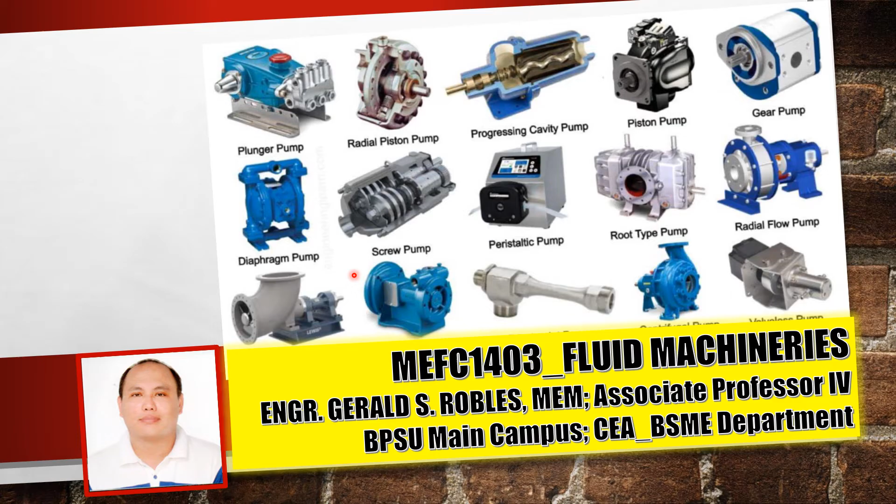So ang featured topic natin for today is about the so-called pumps. So at the conclusion of this PowerPoint presentation, you the student is expected to have a broader idea of what a pump is all about. So ano na ba yung mga possible points of application or usages nito, yung mga classification ng pumps, and then yung mga corresponding examples niya falling under such classification. Then sa citing natin dito yung mga corresponding advantages and then disadvantages, and then yung corresponding parts of such pumps that might fall under such classification.

So bago tayo mag-start sa ating discussion, let us first have a look at the different types of pumps that are commonly found in the market. So tingnan natin one by one yung mga pumps na sinasabi ko. So first one is we have the so-called pitcher pump. Tinatawag siyang pitcher pump kasi nga basically yung pinaka-body niya resembles that of a pitcher o tinutukoy nating pitchel. So another one is we have the so-called centrifugal pump, which is by far the most popular and then most common type of pump that is used in any type of industry.

So later papaliwanag ko yung mga possible reasons kung bakit siya yung pinaka-most popular and the pinaka-most common type of pump. Then another type of pump that could be found in any residential or commercial applications is the so-called jet pump that is used typically in any jetmatic water systems na ginagamit natin usually sa bahay. So another is yung tinutukoy nating reciprocating pump na dahil sa kanyang sheer size or sheer volume, sa sobrang laki niya, it is only to be found in the industrial or power plant industry.

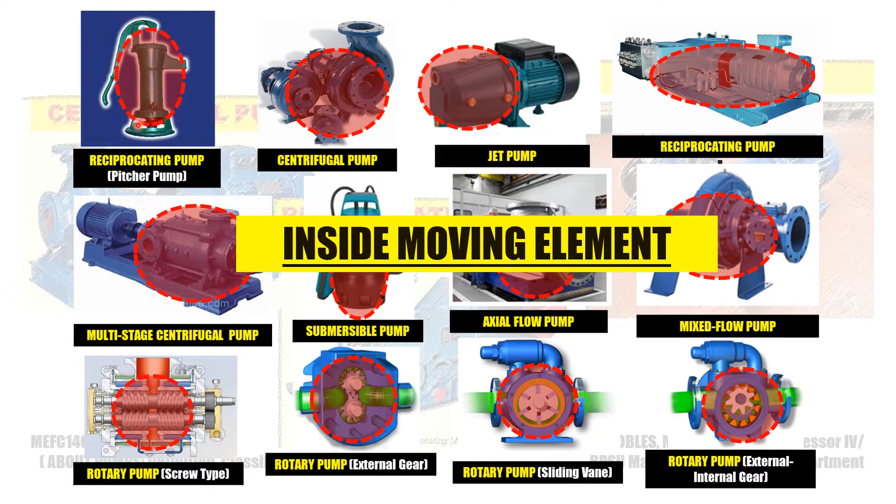So ano ba yung tinutukoy natin pumps? So again, as what was mentioned in our previous discussions, pumps are considered to be machines or devices that are used to handle liquids. So based upon history, yung pumps are considered to be one of the earliest inventions as evidenced by the so-called Archimedes screw, which was used by ancient Egyptians in moving liquids from canals by moving a very large screw that is actually enclosed in a cylinder.

So yung pumps are considered to be one of man's oldest aids. So it only ranks second to the electric motor and then that of the internal combustion engine as the most commonly used device or machine. So pumps are used to handle or convey or move liquids in whatever amounts, from a few liters or gallons up to billions upon billions of any types of liquid for a wide range of applications. So ang pumps are considered to be workhorses.

Wala siyang kapaguran as they could be able to be operated non-stop, not only for a period of 24 hours a day, 7 days a week, 30 days a month, but be certain times that it could also be operated non-stop for a period of 5 to 6 months. So bali, ang pahinga na lamang nila is yung tinatawag nating shutdown or itinutukoy nating preventive maintenance. Where after nito is i-operate na naman natin non-stop yung mga pumps natin and so on and so forth. So bali pa ulit-ulit na lamang yung cycle.

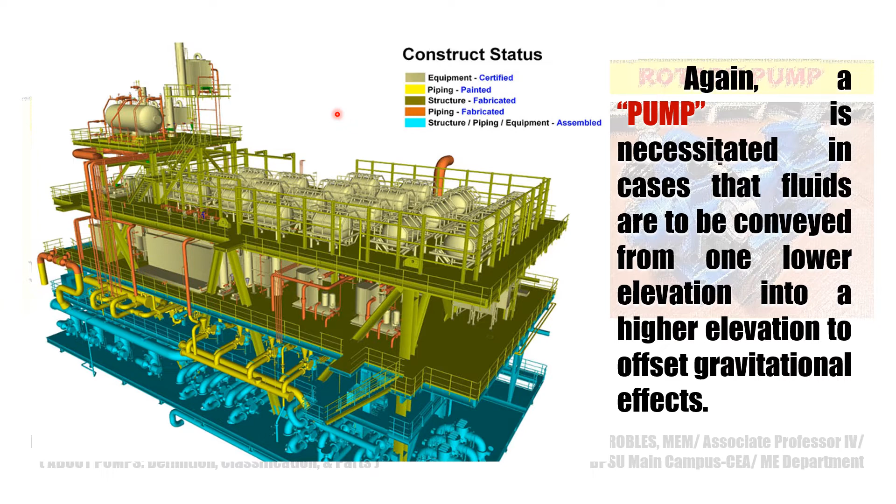As I said before, pumps are not only found in industrial or power plant industries, but also right in our very own homes. We need to remember that for as long as there is a presence of liquid that needs to be moved, a pump is always necessitated.

The liquid being mentioned could be any kind of liquid chemicals, highly flammable or volatile fuels such as jet fuel. It could also be slurry substances, a combination of solid and liquid such as cement mixture, or high temperature liquids with temperatures ranging from 1000 degrees Fahrenheit and above. We can also use pumps to move hazardous or poisonous liquids.

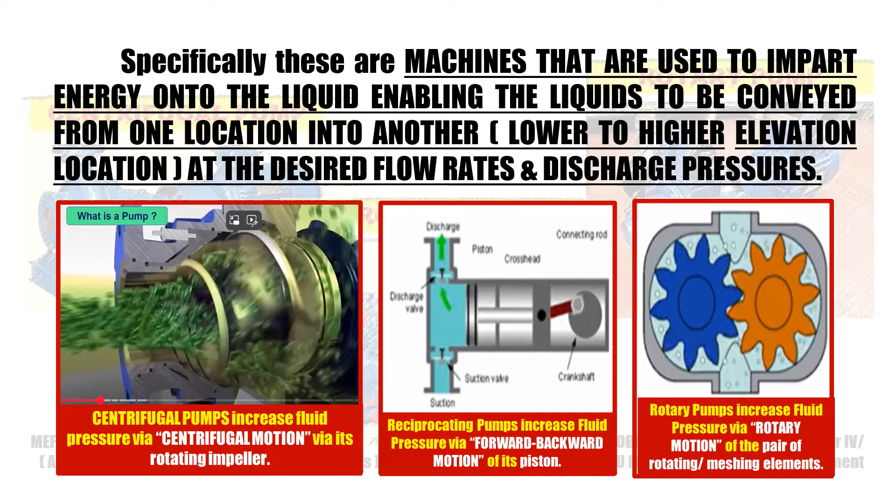Pumps are able to increase the pressure of the fluid or liquid by imparting or transferring energy onto the liquid via the internal working element that a pump possesses. So it's not only that the fluid is moved, but it is also delivered at the desired flow rate, however much or little per unit time, and it can also be delivered at the desired pressure range - high, intermediate, or low pressure ranges.

With all these cited traits or capabilities, this is basically the reason why pumps are considered to be an indispensable kind of machine. We have what is called the centrifugal pump, the reciprocating pump, and lastly, the so-called rotary pump.

So again, the effect of most pumping devices, which should fall under any of the three pump classifications - dynamic or kinetic pumps, reciprocating pumps, and rotary pumps - is to be able to increase the pressure of the fluid.

We need to increase the pressure to be able to offset the effects of gravity, because liquid is considered to be a dense or heavy substance. We need to remember that for as long as we have pressure, it also follows that we are imparting a force to be able to counter the effect of the weight of the fluid that is to be moved or handled.

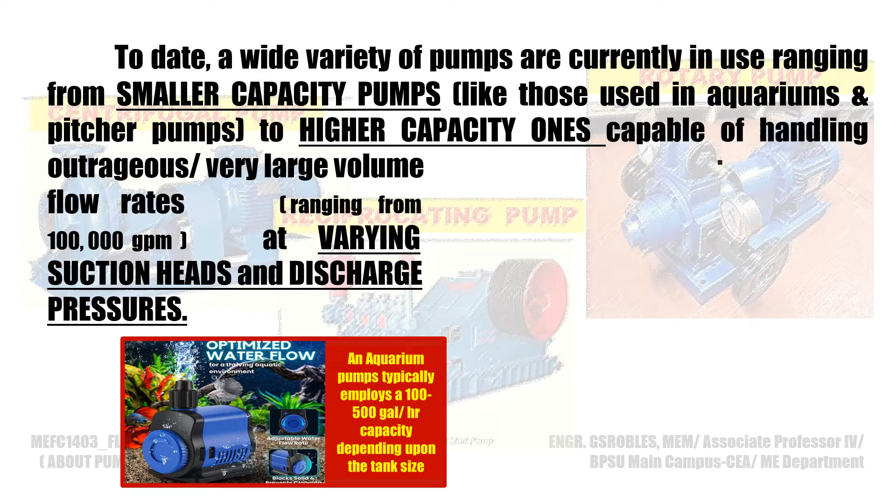To date, we have a wide variety of choices of pumps available in the market nowadays, catering to specific needs. We have smaller capacity pumps like those used in aquariums, and pitcher pumps or the so-called poso found in our backyards.

And then we have the higher capacity ones, with ranges from 100,000 gallons per minute, at varying suction heads - which could be shallow or deep - and varying discharge pressure from high to intermediate as well as low pressure ranges.

With so many pumps available in the market nowadays, what are the pump classifications that we have? Classification of pumps is actually based upon the internal mechanical configuration, and specifically on how energy is actually being transferred onto the liquids.

We have two pump classifications: the so-called positive displacement type, and the so-called dynamic or kinetic type. Under the positive displacement type, two fall under such classification - the reciprocating pumps and rotary pumps. Whereas for the dynamic or kinetic type, only one falls under that category, but it has five types or kinds.

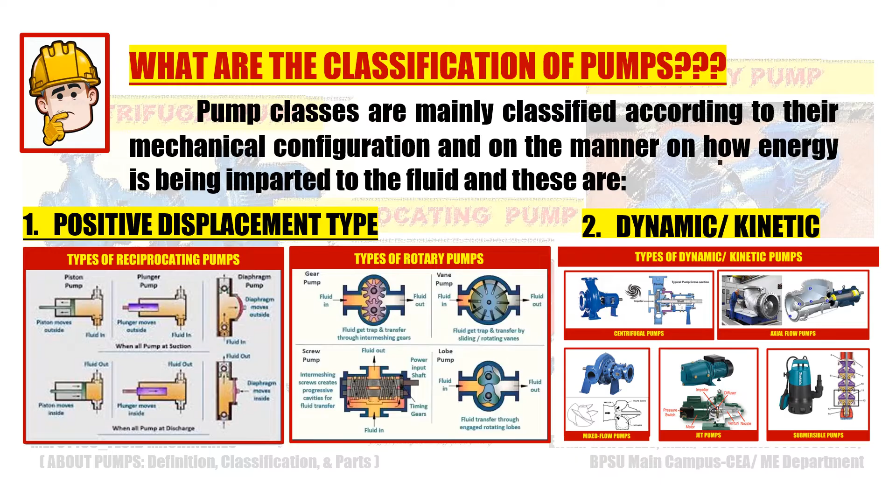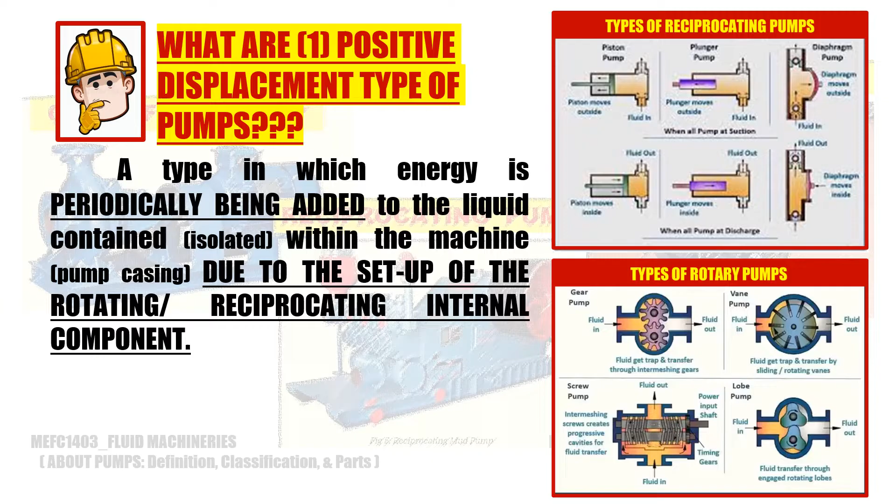Positive displacement type pumps are pump types wherein energy is periodically being added to the liquid being contained or isolated, which is actually part of or due to the setup of the rotating or reciprocating internal component that could be found on the inside. They are called positive displacement type pumps because there is isolation of the liquid which is eventually displaced or moved. Positive displacement type pumps actually offer higher discharge pressure but at lower volume flow rates or discharge rates, as compared to the other pump classification, which is the dynamic or kinetic type of pumps.

A reciprocating pump is one of the two types of pumps falling under such classification. It is considered a positive displacement type of pump that traps a fixed volume of fluid inside the pump casing and physically moves such fluid in a back and forth or reciprocating motion, normally in the form of a piston or a plunger.

As for reciprocating pumps, we have three pump examples falling under this category: piston pumps, plunger pumps, and diaphragm pumps. The piston is basically small in size. The plunger is very similar to the piston, except that its corresponding size is bigger. The piston and plunger pumps basically have a rigid or hard working element, unlike the diaphragm pump, where the working element is actually made from a flexible type of material.

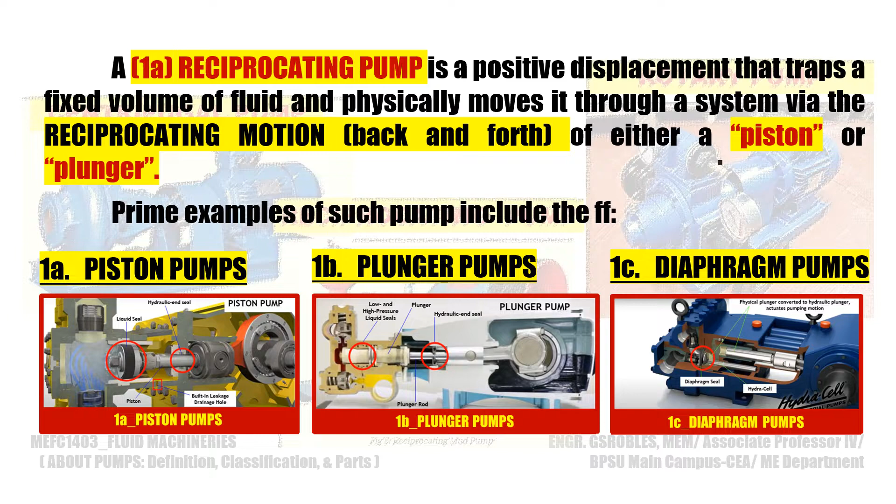As for the working principle, this involves the forward and backward motion of the working element. First, the forward motion: as the element moves away from the suction valve, it creates a vacuum, a negative pressure, sucking in or allowing fluid to move inside the chamber. In the backward motion, as the element moves towards the discharge valve, the fluid is eventually pushed or discharged outside the chamber. This process is repeated over and over again for as long as the prime mover, which is normally an internal combustion engine, is operating.

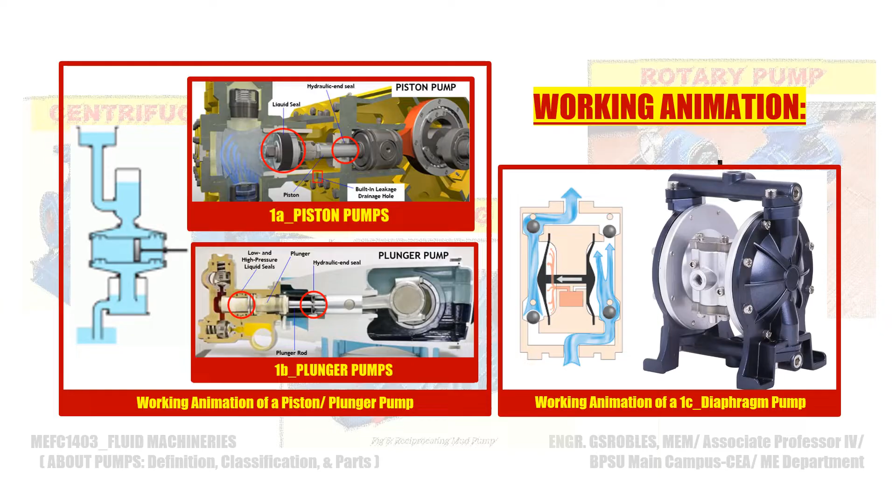Now, to have a better understanding of how such a pump type operates, we have here a working animation of either a piston or plunger pump as well as a diaphragm pump, showing how fluid enters and eventually goes out of the cylinder or chamber.

Let's cite the corresponding differences between a piston and a plunger pump. Earlier it was mentioned that the difference between the piston and the plunger type is in terms of ring sizing. The piston type has a smaller corresponding size, thus it has a lesser rubbing or contacting area. The plunger type is bigger, thus it has a higher rubbing or contacting area. Technically, it gives off a more positive kind of pressure.

Another difference is that the piston type is only used for low pressure applications, light duty or intermittent service. When we say intermittent service, it's not continuous service or continuous operation, rather an on and off operation, meaning there are times it operates and times it doesn't.

As for the plunger type, it is actually used for high pressure applications, meaning heavy duty applications, and for continuous service, since the contacting or rubbing area takes longer to wear down or erode.

Another difference is that since the piston type is smaller, it makes use of a lesser volume of material, thus it is considered less expensive than the plunger type. For the plunger type, a bigger volume of material is used, thus it is actually more expensive than the piston type.

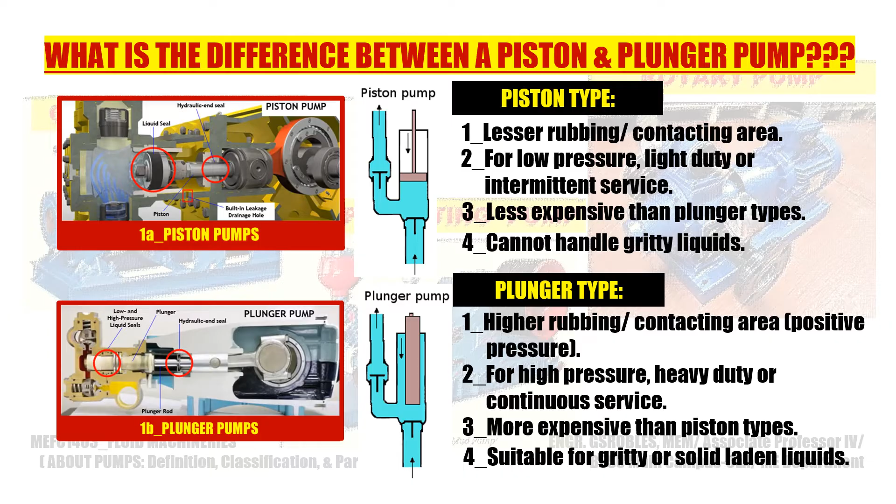So what are the typical parts of a reciprocating pump? One is the main working element, which could either be a piston or a plunger, which moves in a forward-backward or reciprocating motion.

Two, we have the connecting rod, which transmits the reciprocating motion coming from the crank cam assembly. Three, we have the suction valve, which allows fluid to enter the pump chamber or cylinder during the suction stroke. At the time of the discharge stroke, this suction valve is closed.

Four, we have the discharge valve, which allows fluid to be discharged outside during the discharge stroke. Technically, this discharge valve is closed during the suction stroke.

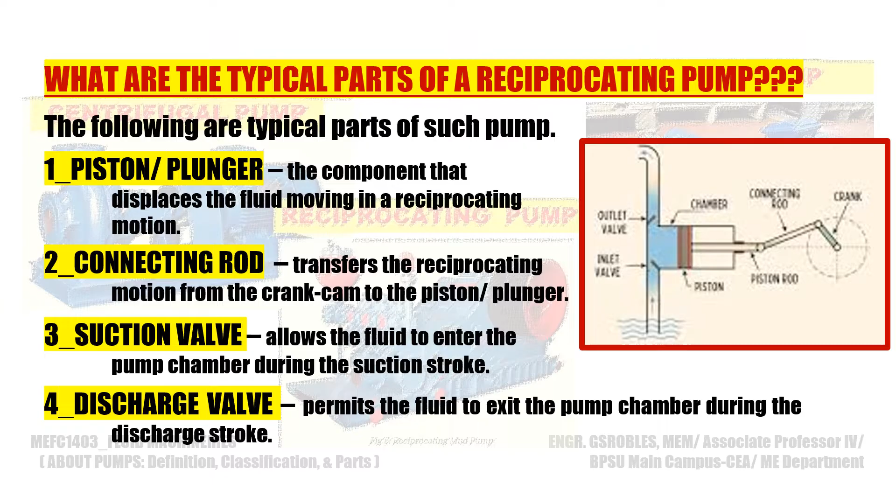So 5 is the so-called cylinder, which is considered to be an enclosure or chamber that allows the reciprocating motion of either the piston or the plunger to take place.

So 6 we have the so-called check valves. The check valve is actually necessitated for it controls the direction of the flow.

Then 7, the last one, we need a prime mover. This one provides the motion on the part of the piston or plunger pump, which could either be an electric motor or an internal combustion engine. But of the two kinds of prime mover, more common is the internal combustion engine as the source of motion in the case of a reciprocating type of pump.

So as for the advantages of a reciprocating pump, we have 3 distinct advantages. One is that it is ideal for applications requiring higher pressure or higher discharge pressure. Number 2 is that as it is able to discharge fluid at high pressure, the same goes with its suction pressure, as it is also able to generate a higher vacuum pressure. So such pumps are used for high head applications, meaning the source is very deep.

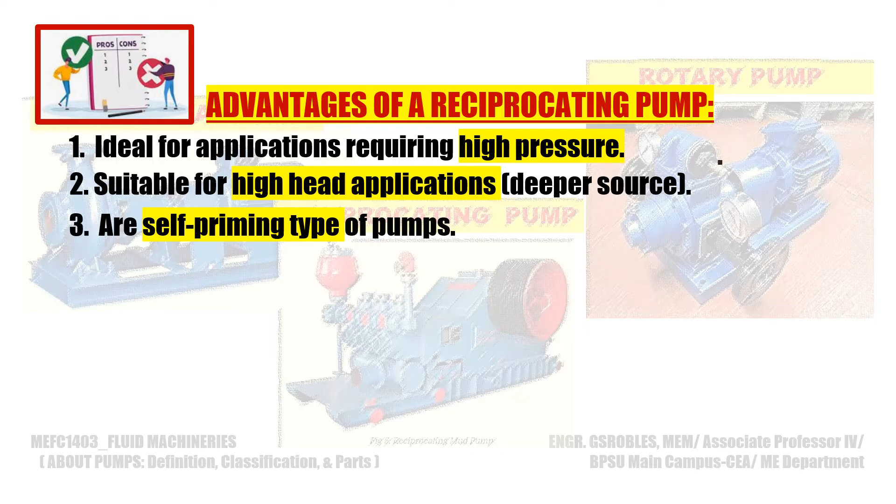Third and last is that such pumps are considered to be self-priming. Upon operation, the pump is able to deliver fluid at the soonest possible time, even without the aid or use of any additional mechanical device to help in pump priming or pump conditioning.

Now let's move to the disadvantages. These are the cited negative attributes. One is that its flow is considered to be pulsating, meaning that the flow is not continuous. So it requires pulsation dampeners for very sensitive applications to correct this flow.

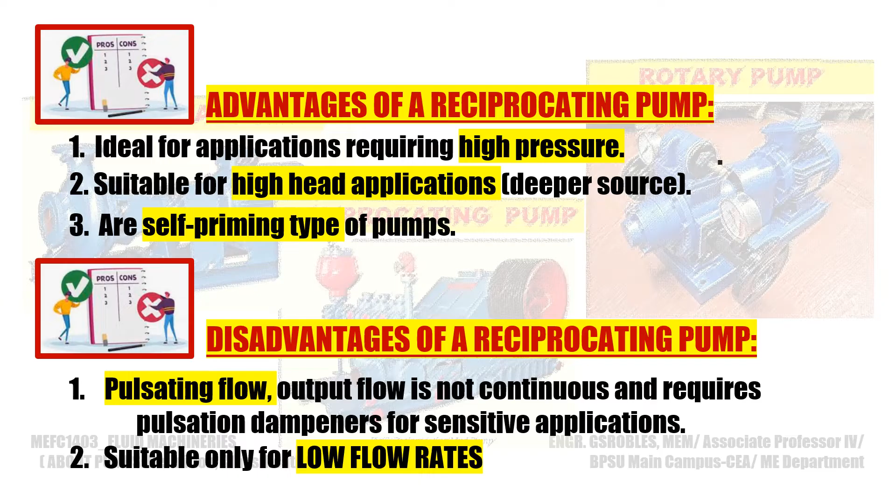Number 2 is that it is only suitable for low flow rates or low rate of discharge.

Number 3, because its internal configuration has very small pockets or clearances inside, it is not advisable to be used for solid-laden or abrasive-laden liquids since there is a possibility that solids may accumulate in these small pockets or spaces. Number 4, compared to other pump types, they are actually more expensive due to its complicated design.

And that it actually requires a larger floor space for mounting.

Number 5 is that during operation, there is strong vibration as well as noise. Then number 6 is that it requires higher or more complicated maintenance due to the numerous moving parts that are subjected to higher pressures.

So if a question arises as to why reciprocating pumps are not advisable for household applications, these are the cited possible reasons. First, the discharge pressure is too high. Another is that it requires a larger mounting space. It's also too expensive, noisy, and has vibrating characteristics which could disrupt the household, and its maintenance is complicated. This actually requires a highly trained individual.

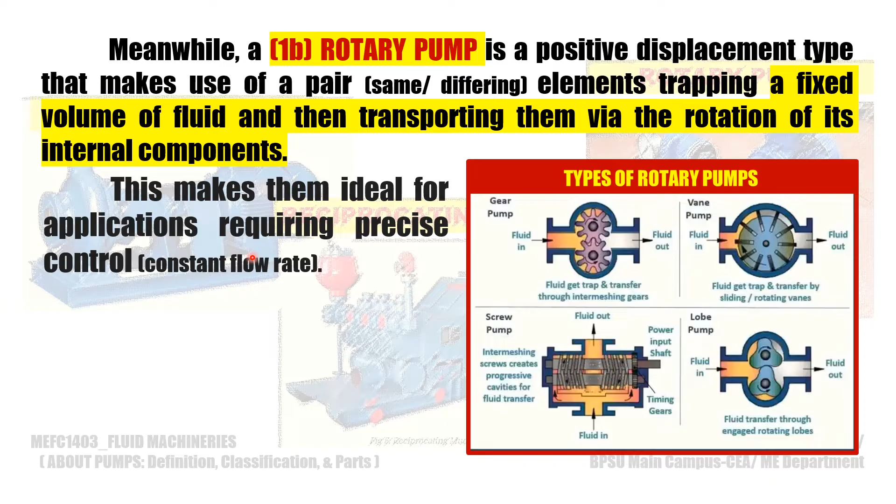This allows rotary pumps to be ideal for applications requiring precise control or constant flow rate. Another is that rotary pumps are versatile in that they could be used for viscous, solid-laden, and sensitive media or fluids evenly without any case of pulsation.

So let's review our discussion. In reciprocating pumps, it is characterized by the forward-backward motion of its main working element inside. In rotary pumps, it is characterized by the rotation of the pair of working elements inside. In both cases, there is enough clearance inside the pump casing to allow the movement of their internal working elements, small enough to prevent possible friction and loss of pressure inside.

In terms of parts, a rotary pump typically has the following: first, the housing or fixed casing that houses or encloses the rotating meshing parts. Second, the rotors, which are the main working element that creates pockets for fluid entrapment and eventual transfer. The rotor could be gears, vanes, screws, lobes, or other elements. Third, the seal, which ensures minimal leakage between the rotating and stationary parts. And then we have the inlet and outlet ports, which serve as the passageway for the entry and eventual exit of the fluid being handled by the rotary pump.

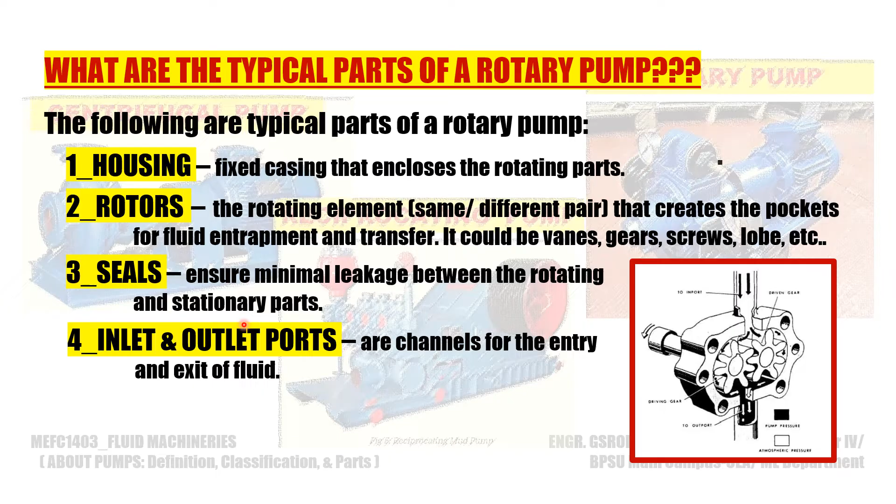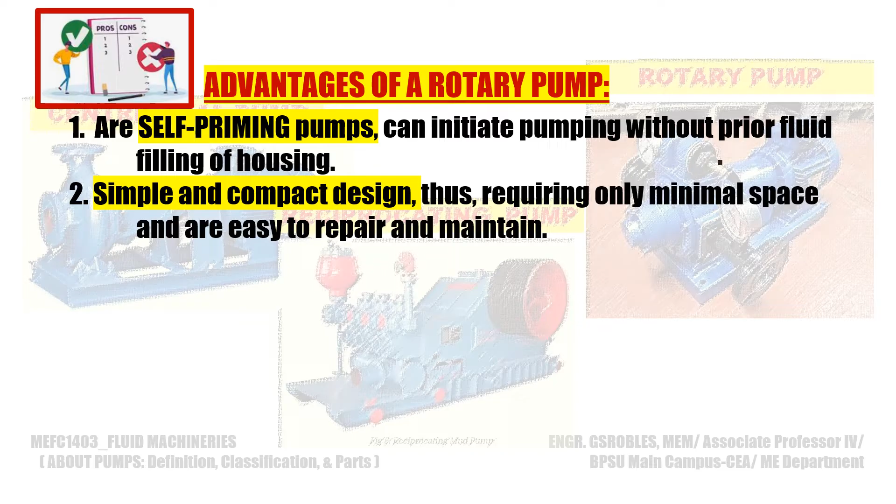As for the pros and cons of a rotary pump, here are the cited advantages. First, like reciprocating pumps, rotary pumps are also self-priming in that they are able to discharge liquid at the soonest possible time without prior need of fluid filling of the housing, which is called priming. Second, unlike reciprocating pumps, rotary pumps have a very simple and compact design, meaning they only require minimal mounting space and are thus easier to repair and maintain.

Now as for the cited disadvantages: such design requires tight clearances between the rotors and housing, which could eventually lead to possible wear and tear over time, leading to a loss in overall efficiency. Second, such pumps are not designed for high-speed applications, as it could eventually cause wear and tear on the part of the rotors.

Third, like reciprocating pumps, rotary pumps too are considered noisy during operation and require some soundproofing measures in some applications. Fourth, there are certain types which are not suitable for solid-laden or abrasive liquids. Fifth, rotary pumps have the second lowest discharge pressure among the pump kinds, with the reciprocating pump being the highest and the centrifugal pump being the lowest. Lastly, similar to centrifugal pumps, rotary pumps are susceptible to cavitation, an undesired or destructive phenomenon where there is formation and eventual collapse of vapor bubbles, which could possibly damage the rotors and inside surface of the housing.

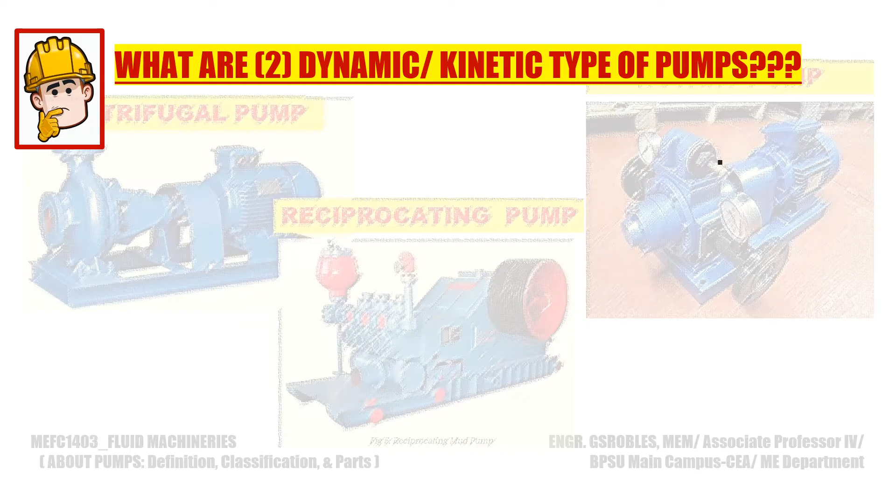Now, the last classification of pumps is the so-called dynamic or kinetic type, which is by far the most common and most popular type of pump available in the market. Most of these are what we see in our households. A dynamic or kinetic pump is a pump type wherein energy is continuously added to increase the speed or velocity of the fluid being handled, hence the term kinetic, mainly because of its main working element, which is what we call the impeller.

Under dynamic or kinetic pumps, we have the centrifugal pump, the axial flow pump, the mixed flow pump, the jet pump, and the submersible pump.

In these pumps, the fluid or liquid is able to enter the pump casing without any delays or interruptions because there is nothing blocking it—there is a continuous passageway from the side. Hence, there is continuous energy transfer by the rotating element in the form of what we call an impeller. Let's look at each one by one. For the centrifugal pump, it enters from this side and exits without much delay or interruption.

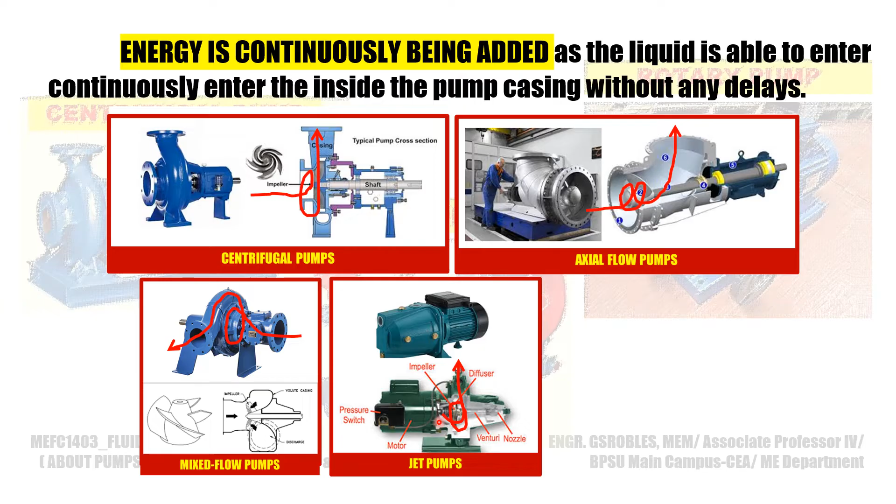Same with the axial flow pump: it enters, swirls before being diverted vertically. Same with the mixed flow type of pump: it enters, swirls, and is then diverted to the other side. For the jet pump, it's the same—it enters, revolves radially before being discharged radially again on the other side. Then we have the submersible pump: from its base or bottom, it enters, swirls along the impellers before being diverted to the other side or end.

So let's review so far. If you recall, the reciprocating pump is characterized by the forward-backward motion of its piston, plunger, or diaphragm, whereas the rotary pump is characterized by the rotary motion of the pair of meshing or rotating elements, which could be vanes, gears, screws, lobes, etc. In both pump types, the fluid is trapped and then moved by the working element inside, hence the term positive displacement type—it cannot move or transfer energy unless the working elements inside are able to move due to the part configuration inside. In the case of dynamic or kinetic pumps, there are not as many interruptions because the passageway is almost a straight path.

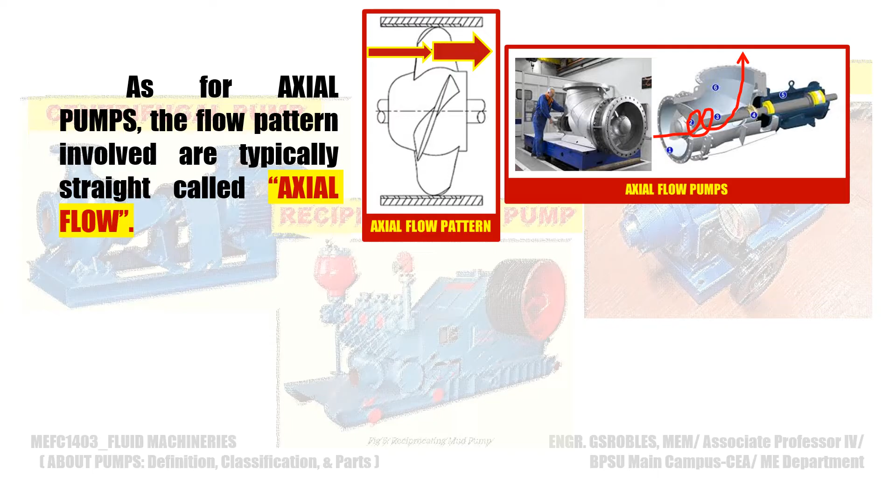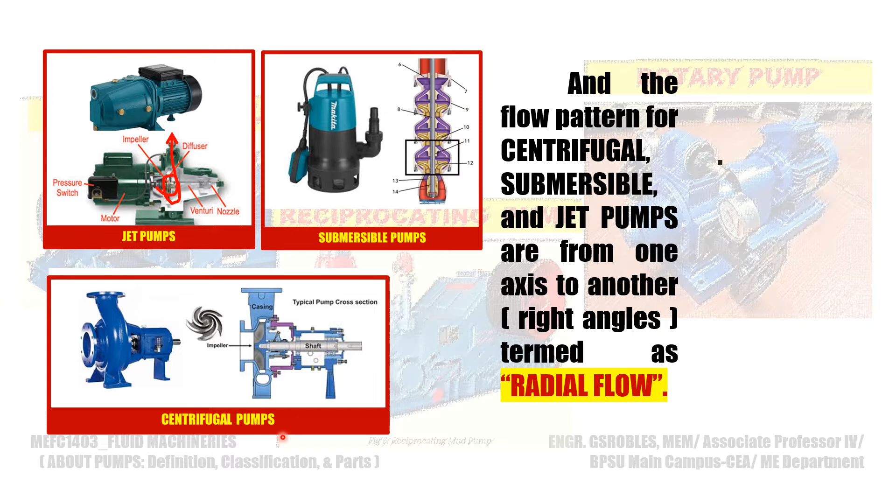Now, as for the pumps falling under this category, yung tinutukoy nating dynamic or kinetic type of pumps, meron tayong three kinds. Namely, we have the so-called axial pumps, then we have the so-called mixed flow pumps, and then third and last one, we have the so-called radial flow pumps.

So, unahin muna natin yung axial pumps. Dito sa tinutukoy nating axial pumps, yung fluid to be conveyed or moved is moved parallel to the pump shaft. Tapos yung impeller natin dito is similar to the propeller of boats or sa mismong impeller or propeller ng isang electric fan, which is technically ito.

Now, itong type na to provides a high volume flow rate or yung tinutukoy nating rate of discharge. So, in terms of design, very simple siya, thus simple din yung kanyang corresponding maintenance. Ang downside lamang nito is that hindi siya suitable for high head applications, so meaning, pang mababaw lang yung source niya. At another drawback is that it needs priming or pump conditioning, or iba pang tawag, hindi siya self-priming.

Now, for axial pumps, its point of application include flood control, irrigation, cooling systems for water circulation, or scenarios requiring high volume flow rates, or pangmalaki ang volume of fluids involved.

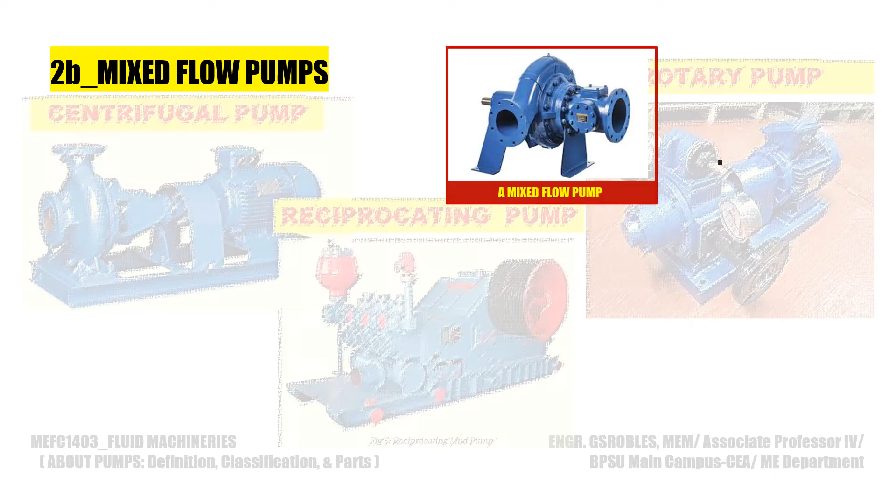So next is yung tinutukoy nating mixed flow pumps, where the fluid is to enter a different axis before being discharged into another axis. So sabihin, same plane pero magkaiba ng axis, so more than one possible direction. Para siyang at right angles pero horizontal.

So, ito yung tinutukoy niyang propeller profile, which is technically quite different sa ginagamit natin sa tinutukoy nating axial flow pumps. Capability-wise, it provides a medium rate of discharge or volume flow rate, and then it is suitable for medium head application. So, meaning, hindi pang malalim or hindi din siya pang mababaw na source.

Now, as compared to axial and then radial pumps, medyo complicated yung kanyang build or design. And then another is that it is not considered to be a self-priming type of pump. So, for its application, it is actually used for storm water management, agricultural irrigation, and then water supply systems, or for applications requiring a balance between volume flow rates and then head applications.

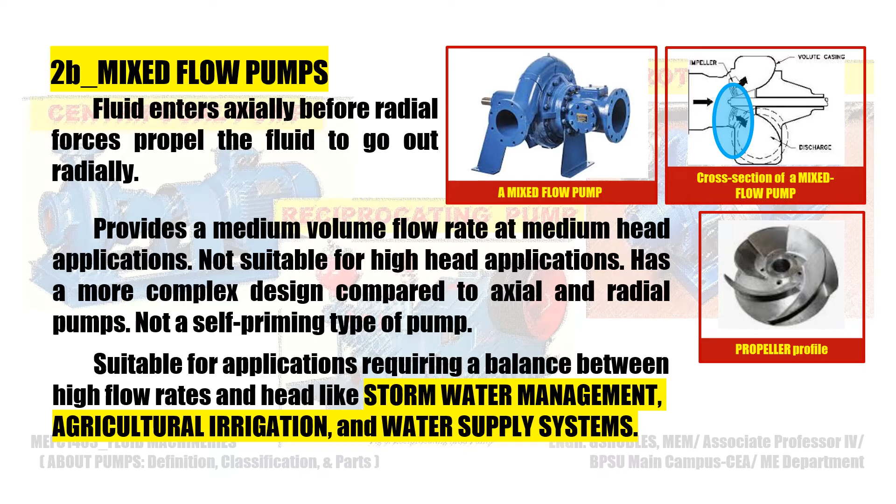So, ano ba yung tinutukoy nating submersible pump? As the name implies, these are pumps that are directly submerged into the fluid source itself. At times, ang tawag sa kanya is what we call a vertical or turbine pump, mainly because of the orientation of the impellers mounted on the rotating shaft to where they are to be mounted. Tinatawag siyang turbine pump din, mainly because mukha siyang turbina, pero instead na siya is mounted horizontally, ang mounting niya is mounted vertically. So, they find great use in flood water mitigation or drainage applications, and then groundwater extraction.

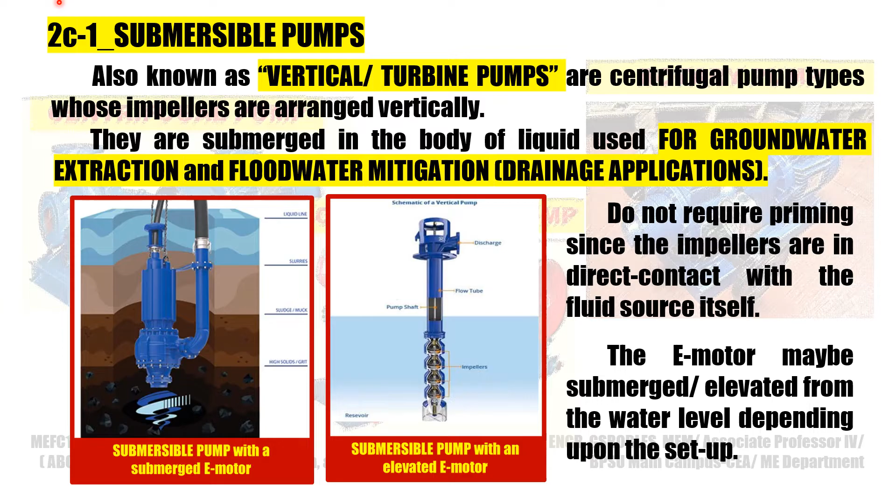Depende upon the pump setup. Doon naman tayo sa second kind of radial pumps is the so-called jet pump, which are commonly found in jetmatic water applications or systems in household services. Tinatawag din siyang hydraulic lift pumps that works on the principle of fluid dynamics using a Venturi meter or Venturi nozzle.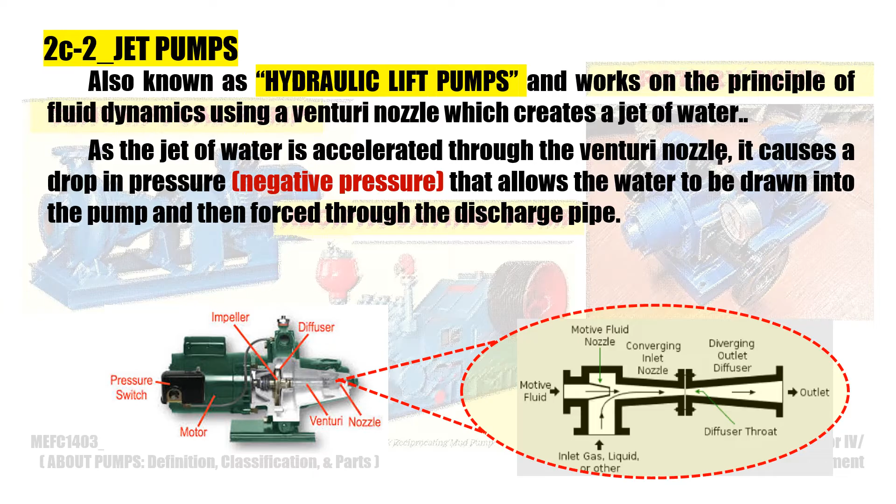Sa Venturi, as water is being accelerated and then discharged through a Venturi nozzle, it eventually causes a drop in pressure, more commonly known as vacuum or negative pressure. Yung madidevelop nating vacuum or negative pressure is used to draw in fluid from a suction pipe and then draw out such fluid through a discharge pipe. So, jet pumps are not self-priming. Kung hindi siya self-priming, it requires priming, so that fluid could be sucked in and then discharged out in the least possible amount of time. Ang jet pumps finds great use in household water applications and then irrigation purposes.

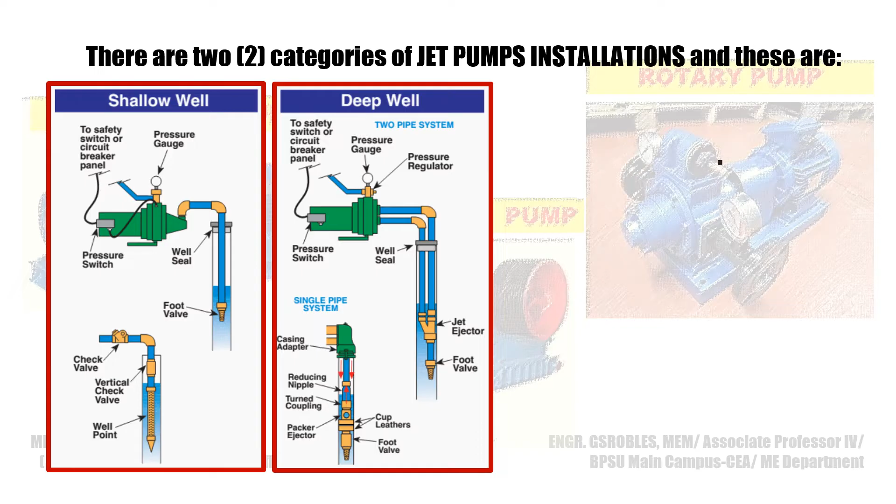Now, we have two types of jet pump applications, which is totally dependent upon the depth of water source. Meron tayong tinatawag na shallow well, and then we also have the so-called deep well. Kapag mababaw, we have the so-called shallow well, whose water depth is up to 25 feet, mainly used for residential water applications and for irrigation purposes. Pagka malalim naman siya, tinatawag natin siyang deep well installation, involving water depths of as much as 150 feet, mainly ginagamit natin siya for larger properties and for commercial applications.

Now, last of the so-called radial pumps is yung tinutukoy nating centrifugal pump. Itong pump na to is by far considered to be the most popular and then most commonly used type of pump available in the market. Dito, yung fluid natin is made to enter actually along the pipeline via the so-called eye of the impeller. Ito, butas na to, ito yung tinutukoy nating eye of the impeller, para siyang eye socket. So, before yung pinaka-fluid natin is discharged radially outwards o outside.

Dito, it is marked by an increase in speed or velocity. Yung pagtaas ng speed ng fluid natin is partly because of the high-speed revolving impeller. Now, as the fluid is actually contained within the pump casing, yung high speed of the fluid is eventually converted into a high pressure.

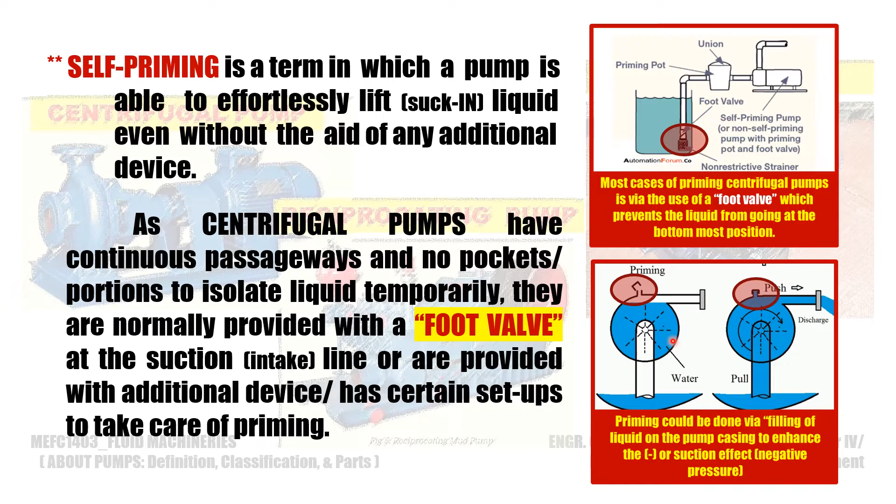As mentioned a while back, the kinetic energy given off by the high-speed revolving impeller is eventually transferred onto the fluid being handled. So eventually, this kinetic energy is subsequently converted into what we call pressure energy at the point of discharge.

The main drawback of the centrifugal pump is its lower discharge pressure. But this lower discharge pressure can somehow be alleviated or remedied. We have at least two possible ways.

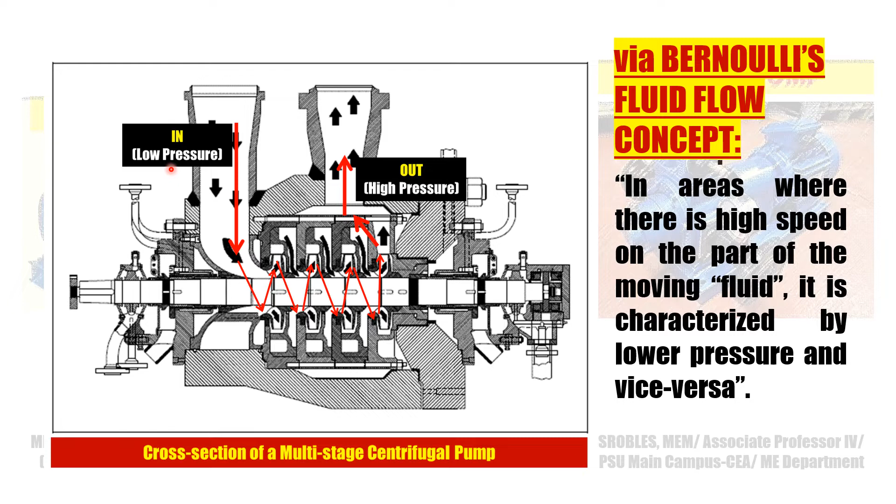To explain this concept, we need to understand Bernoulli's fluid flow concept. It states that in areas where there's high speed on the part of the moving fluid, it is characterized by lower pressure, and vice versa. So if the fluid speed is fast, eventually its pressure is low. Therefore, based on this concept, if we reverse it, as in we slow down the speed of the liquid, somehow its low pressure characteristic becomes high pressure.

Our idea here is that increasing the number of passageways also increases friction. Technically, as the friction increases, the speed slows down. So eventually, along the way, we've modified the discharge pressure.

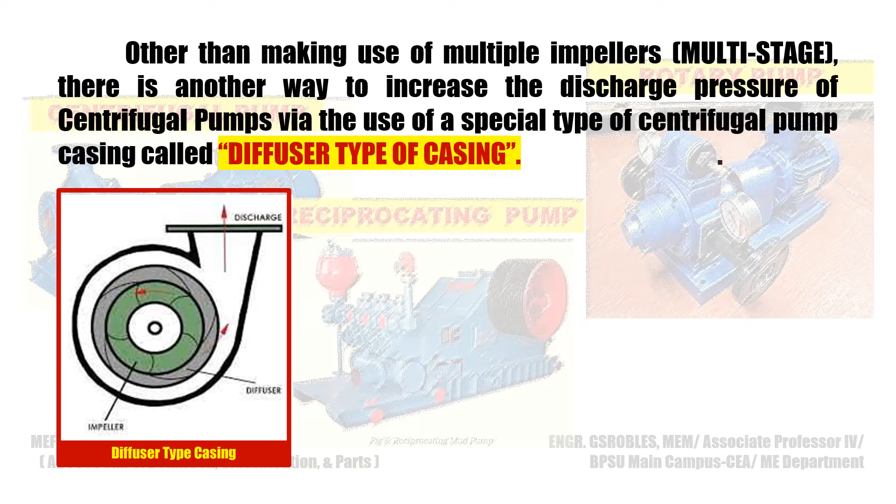Now, other than making use of a multi-stage centrifugal pump or multiple impellers, there is another way or means to correct the lower discharge pressure provided by a typical centrifugal pump, which is by the use of a special type of casing—this is the diffuser type of casing.

So we have three classes of pump casing. The most common is the so-called volute type of casing. Second is what I'm discussing now, the diffuser type of casing. The last one is the so-called vortex casing.

In the diffuser type of casing, we have two portions here. This green one is the high-speed rotating impeller. The other portion is the fixed vanes, and the vane direction is opposite compared to the vanes of the rotating impeller.

Our idea here is why it's done in an opposite direction or manner—it's to somehow slow down the speed. Because based on Bernoulli's fluid flow concept, when we slow down or diffuse the speed of the moving fluid, its corresponding pressure characteristic rises. So slowing down the speed of a moving fluid is actually characterized by a higher pressure region. Thus, we have a higher discharge pressure.

For the other kinds of centrifugal pump casing, we have the so-called volute casing and vortex casing. The volute casing is the most common or typical, where the discharge pressures involved are low, because the fluid speed inside is not modified in any way. Since the rotating impeller spins fast, the liquid eventually receives that high speed. So in the end, the liquid is high speed, and since the liquid is high speed, the discharge pressure ends up being low.

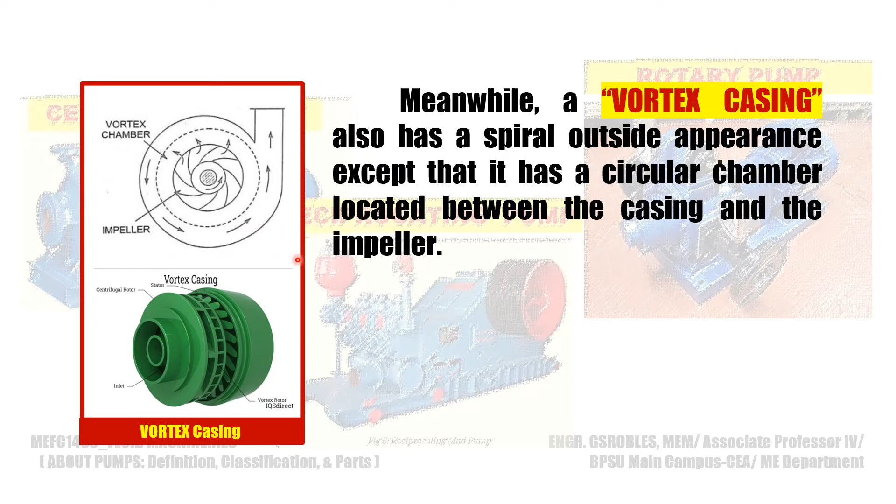The main purpose of this chamber, this imaginary circle, is to reduce the eddy formation. In eddy formation, there is a kind of flow characterized by backflow or opposite flow. So when we minimize the eddy formation, it translates into a smoother flow, which helps improve overall pump performance, and eventually increases the pump efficiency.

Now, moving on to the very last part of our discussion are the typical parts found within a centrifugal pump — the innermost components of a centrifugal pump. Our goal is for you to be familiar with the corresponding parts found inside the so-called centrifugal pump. So what are the typical parts of a centrifugal pump?

One is the so-called impeller. Let's review our discussion so far. In a reciprocating pump, we have what is called a piston, plunger, or diaphragm. In rotary pumps, we have rotors. In centrifugal pumps, which fall under dynamic or kinetic types of pump, we have what is called the impeller. So what is the impeller?

The impeller is the high-speed rotating part from which the high-speed or high-velocity characteristics of the fluid being handled inside the pump originate. In the impeller of a centrifugal pump, we have three classes.

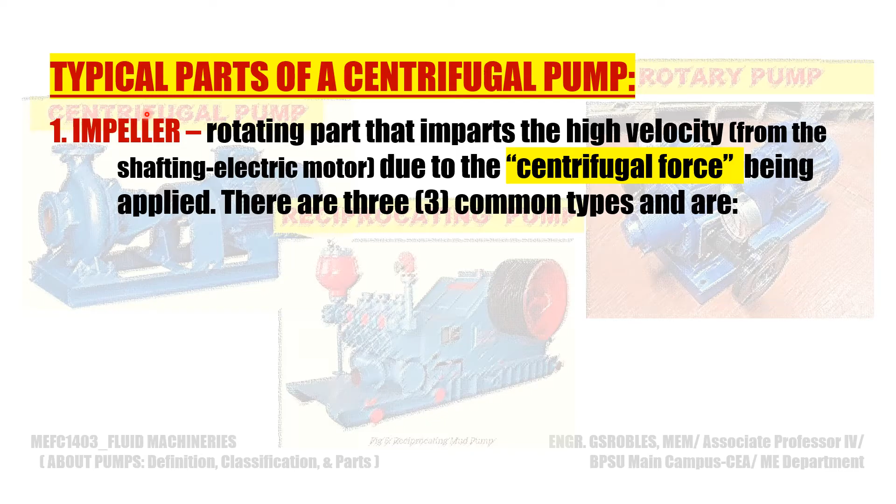First, we have the open type. In the open type, it has vanes attached to a central hub — this paddle-like portion — which is connected by relatively small shrouds at the base. So the paddle-like portion, which is the base, is actually connected to the central hub by means of this shroud, which is only partial.

Another is the so-called semi-open type. It's similar to the open type, except that the shroud here is actually a full plate. Unlike the open type where it's not complete, here it is a full shroud.

Lastly, we have the so-called closed type of impeller. This one has vanes sandwiched in between two shrouds or plates, with the central hub at the middle. These are the vanes, and these are the shrouds — they are full, like a plate. And this is the hub, here and here.

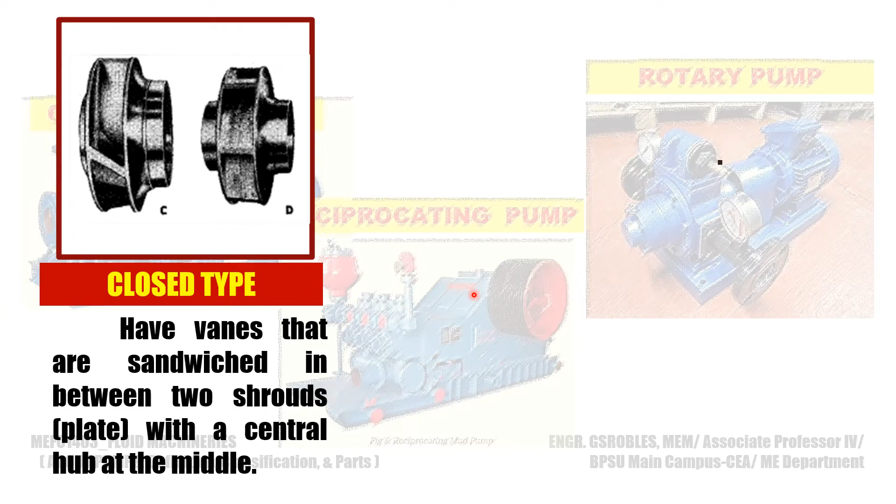So type C is considered a single suction closed type of impeller, meaning it has only a single passage of fluid characterized by a shorter shaft at one side. Type D is what we call a double suction closed type of impeller, characterized by two entry points of fluid, and we can see two shaft portions or one whole shaft located at the middle.

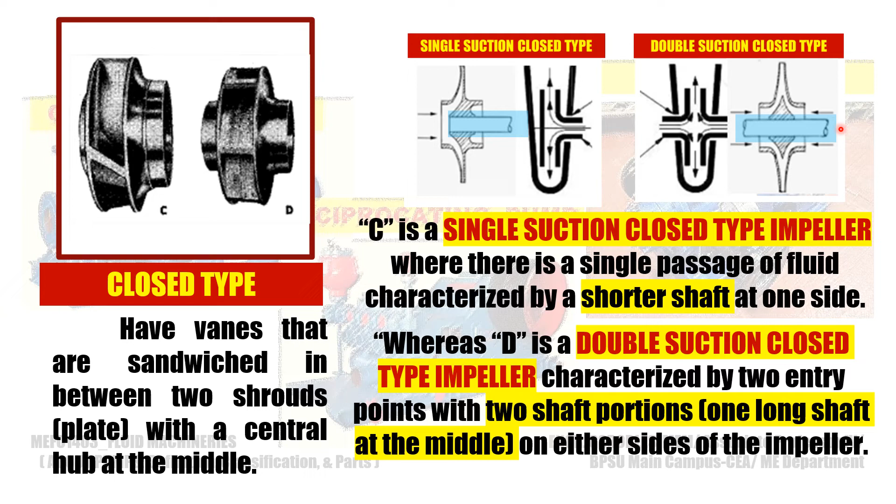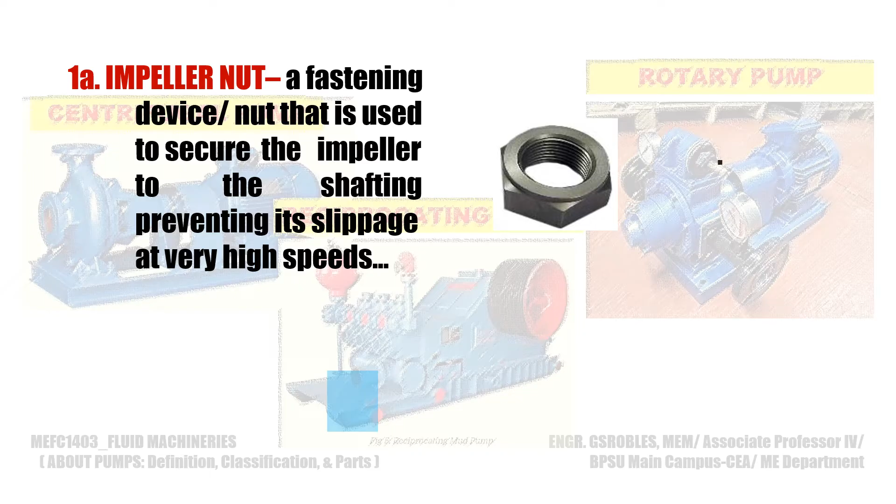Next centrifugal pump part is the so-called impeller nut. As the shaft-impeller assembly rotates at high speeds, there is a possibility that the impeller may become dislodged from its mounting on the shafting. So we need to properly secure the impeller to the shafting. To do this, we use what is called the impeller nut.

The impeller nut is fastened to the external threads located at the tip of the shafting. Here is the impeller nut, here is the impeller, and here is the shafting. To properly secure this fast-revolving or moving impeller to the high-speed rotating shafting, we need to use an impeller nut.

Next part is the casing, which could be a multi-stage impeller casing, a volute type of casing, a diffuser type of casing, or even a vortex type of casing. This is the part that encloses the impeller or impellers, gives direction to the flow, and also converts the kinetic energy of the fluid into pressure energy.

We have two split types of casing. First, we have the so-called vertical split type of casing, where the split is done vertically. We use this for either a single suction closed type, open type, or semi-open type of impeller. Whereas the horizontal split type of casing is specifically for a double suction closed type of impeller. This is the casing.

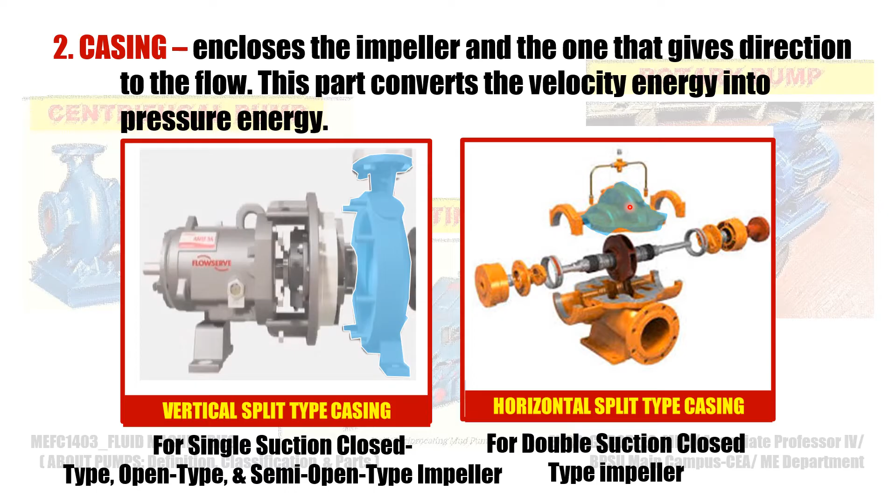Also, a multi-stage centrifugal pump makes use of a horizontal split type of casing. Why horizontal and not vertical? Our concern here is this: if we need to pull out the impeller, it's easier to pull it out in that direction instead of pulling it out horizontally. Because if we drag it sideways, there's a tendency for the impeller to get damaged.

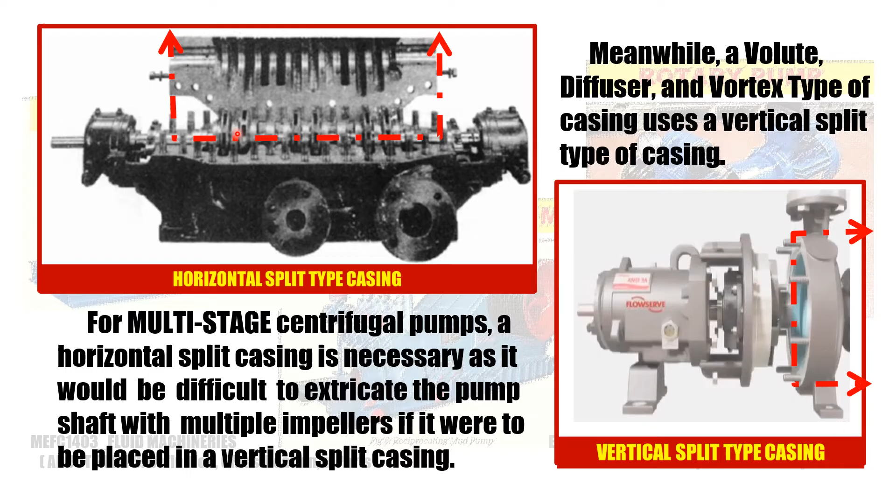Meanwhile, on the other hand, a volute diffuser and vortex type of casing also makes use of a vertical split type of casing. Since the impeller is not as long as that of a multi-stage impeller system, it is actually advisable to use a vertical split type of casing rather than a horizontal split type of casing. So another centrifugal pump part is the so-called shafting.

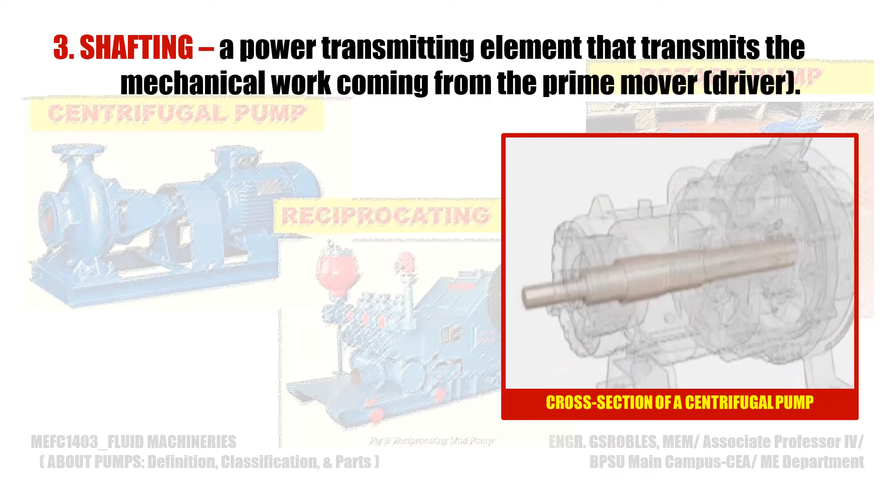The shafting is considered to be a power transmitting element that actually transmits mechanical work coming from the prime mover to the rapidly moving impeller. It is actually made from corrosion and wear-resistant type of material, with stainless steel normally being used.

If we look at its configuration, its cross-section is not common, meaning the corresponding diameters are not equal. It has different cross-sectional diameters with certain grooves or portions where specific centrifugal pump parts are to be mounted, such as bearings, oil seals, and others. That's just an indication of why the cross-section of our shafting is not common.

Now, as a properly working shaft is considered to be quite important or integral to the safe and efficient working condition of a centrifugal pump, care must be exerted onto the shaft at all times. So if a shaft had been damaged or worn out due to erosion and cavitation as well as other debilitating conditions, we can still use it.

How? We have what is called a rebuilding process or rebuilding condition. Here, we weld evenly the whole surface of the shafting. Upon welding or filling the surface with welds, eventually we require it to be machined using a lathe machine, according to its original dimensions or specifications. After the rebuilding process, you won't notice anymore that this shafting is old.

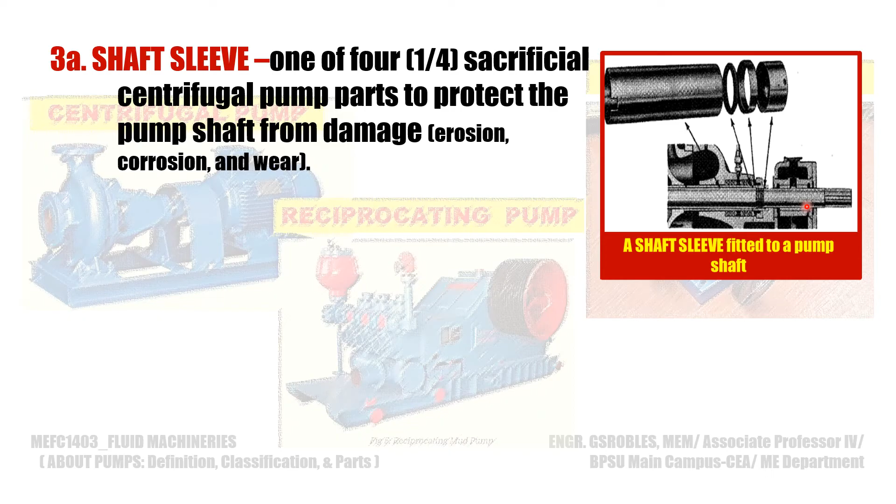So next, we have what is called a shaft sleeve. This shaft sleeve is inserted onto the shafting. This is one of the 4 possible sacrificial centrifugal pump parts that could be found in a centrifugal pump. This part actually protects the shaft from possible erosion, corrosion, and wear during pump operation. It's like cut portions of a pipe or a tube that fits snugly.

When we say snugly, it's just right, not too loose and not too tight with respect to our pump shaft. This is actually made from materials that are compatible with the pump shaft, but in terms of material strength, it is weaker. Because our goal here is not to let the pump shaft get damaged completely, rather we need to protect it. So instead of the pump shaft getting damaged directly, the first thing to get damaged here is the shaft sleeve.

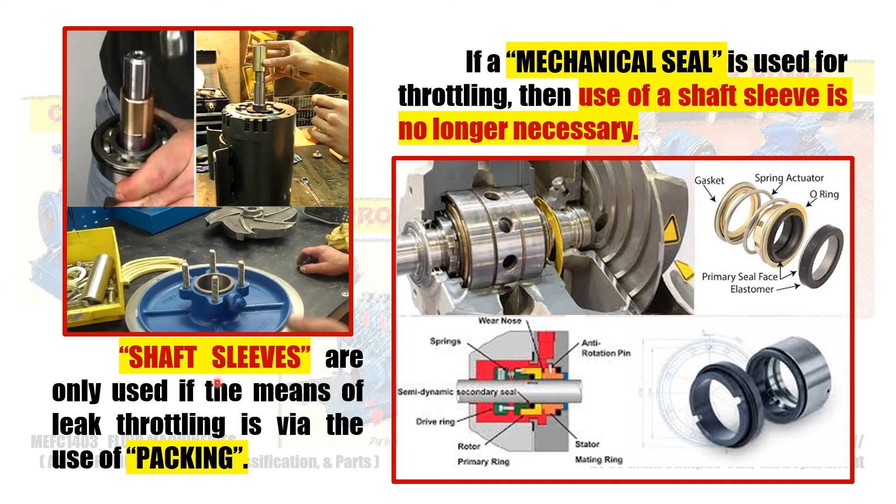Now, we have cases wherein the presence of shaft sleeve ceases to exist, meaning there are cases when we don't use a shaft sleeve. Supposedly, we use packing to throttle, meaning to control, the leak. If we use packing as a means of controlling the leak within the pumps, we use a shaft sleeve. However, in case we don't use packing to control or throttle the leak and instead use a mechanical seal, we no longer use the shaft sleeve. So that's the particular requirement: there's a shaft sleeve if there's packing, no shaft sleeve if there's no packing and instead we have a mechanical seal.

Next, we have the so-called shaft key, which is considered another sacrificial centrifugal pump part. This is considered a fastening device, other than the impeller, to make sure the impeller is rigidly connected to the shafting. We have grooves on the part of the impeller, and also grooves on the part of the shaft. When we connect the impeller to the shafting, it forms one complete slot, and into that slot we connect the shaft key. There are many shapes of keys, though the common one we use usually has a square or rectangular cross section. Since this is considered a sacrificial part, it is made from a less strong material.

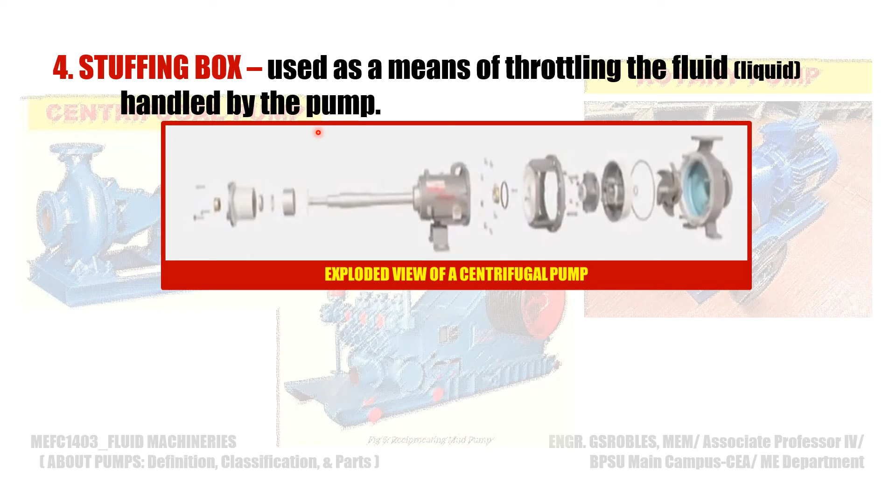Next, we have the so-called stuffing box. Let's look at where the stuffing box is. Let's define the stuffing box first. A stuffing box is used as a means of throttling or controlling the fluid or liquid being handled by the pump. Looking at the configuration, this is the stuffing box. It's not literally a box with corners; rather, it's called a box because it is not a separate part but is actually made up of a group of small details.

We have the so-called packing. This is the packing, seen on both sides. In between the packing, we see the seal cage. And last, to compress and adjust the corresponding pressure, we use the so-called gland. Or, if these three are not present in a stuffing box, instead we'll see a mechanical seal. So this is the stuffing box.

The stuffing box is used to control or throttle the leak from taking place within the pump casing. Why is there a leak? Let's see: this is the pump shaft, this is the stuffing box, this is the frame of the pump, and this is the impeller. Since we use a pump, that means we generate additional pressure, pressurizing the fluid being handled inside the pump casing. Now, if we look closely, there are small gaps or clearances, and these are also the reason for leaking inside the pump casing. So technically, if we don't seal or block it, we'll have leaking on the inside of the pump casing due to the high pressure.

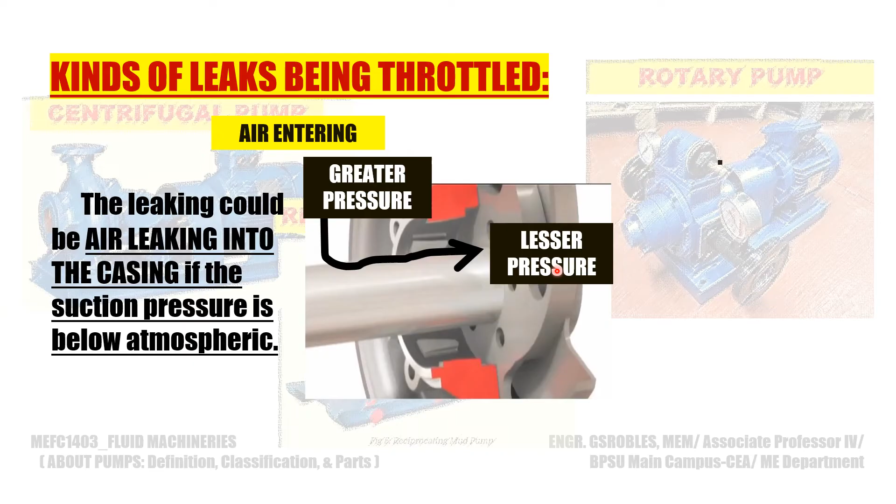Now, the leaks being throttled or controlled on the inside of the pump casing are not just one, but two. The leak could be air leaking into the pump casing, since supposedly the suction pressure is below atmospheric, meaning the pressure inside is lower than the pressure outside. Technically, the lesser pressure will be overcome by the greater pressure, so the air will pass from outside towards the inside. Or, the other case is liquid leaking from the casing, where supposedly the suction pressure is above atmospheric, meaning the pressure inside is higher than the pressure outside. Again, the greater pressure region overcomes the lower pressure region, so eventually we'll have liquid leaking.

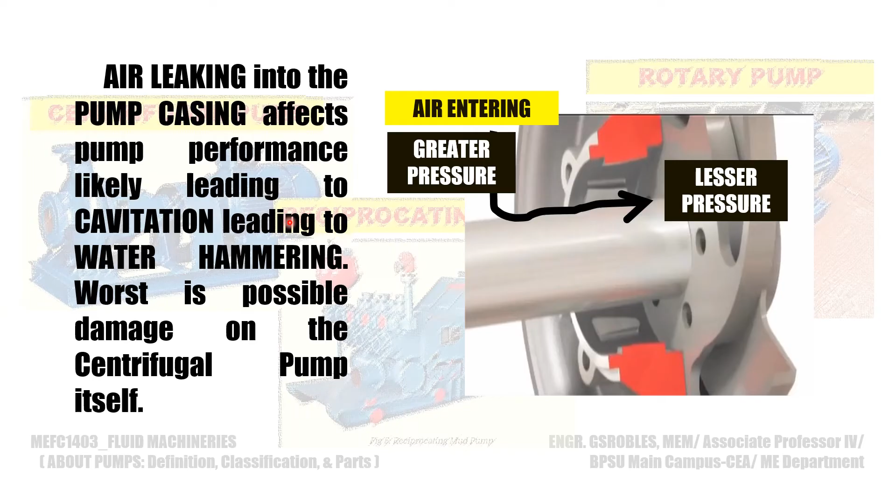So what's the downside? What are the negative effects of these leaks? Air leaking into the pump casing affects pump performance, likely leading to what we call cavitation, and eventually what we call hammering. Because of bubble formation hitting the vanes, the tendency is for the bubbles to release a certain amount of pressure from the inside. This pressure is so great, so high, that it can eventually destroy the impeller. We'll understand the cavitation phenomenon better when we get to that topic. The hammering, meanwhile, is likely a result of vibration.

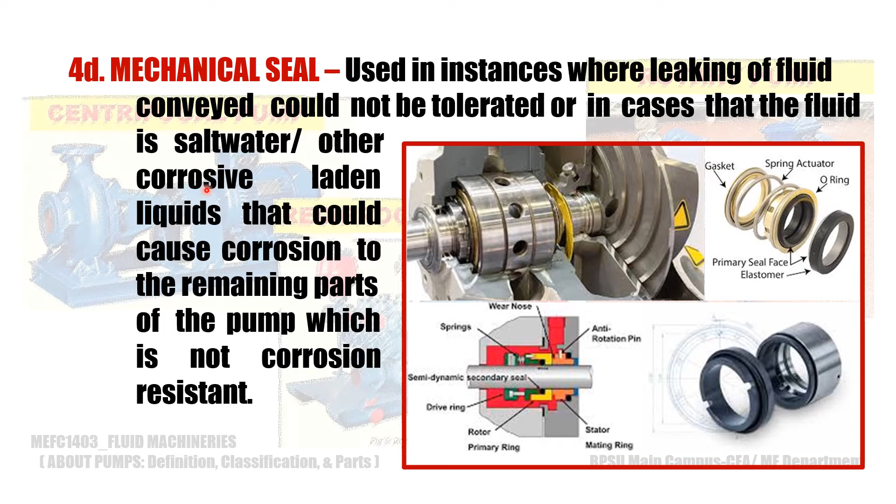And then, yung papalit naman sa tinutukoy nating packing is yung tinutukoy nating graphite ring material. Kahit meron tayong direct contact of rotating parts, nami-minimize pa rin natin yung incidence ng friction kasi ang pinalit natin dito sa packing is yung tinutukoy nating graphite material. Kahit meron siyang direct contact, dahil talaga napaka-smooth ng kanyang finish, very minimal yung build-up ng tinutukoy nating friction. So, sabihin, walang possible overheating that might actually take place.

So, next one is you have the so-called bearings. Another important centrifugal pump part that is used to properly align the pump shaft as well as to carry on radial loads and then thrust loads. Radial, ibig sabihin, umiikot yung pinaka-load natin, yung pinaka-weight.

And then thrust loads naman, may mga tendency kasi na magkaroon tayo ng sudden surge in electricity, so tatalon bigla yung pinaka-shafting natin - yun yung tinutukoy nating thrust loads. So, a pump with a misaligned shaft will stop working eventually. Thus, proper alignment of the shaft is a must. Kinakailangan ma-align natin properly yung shafting by the means or use of the so-called bearings.

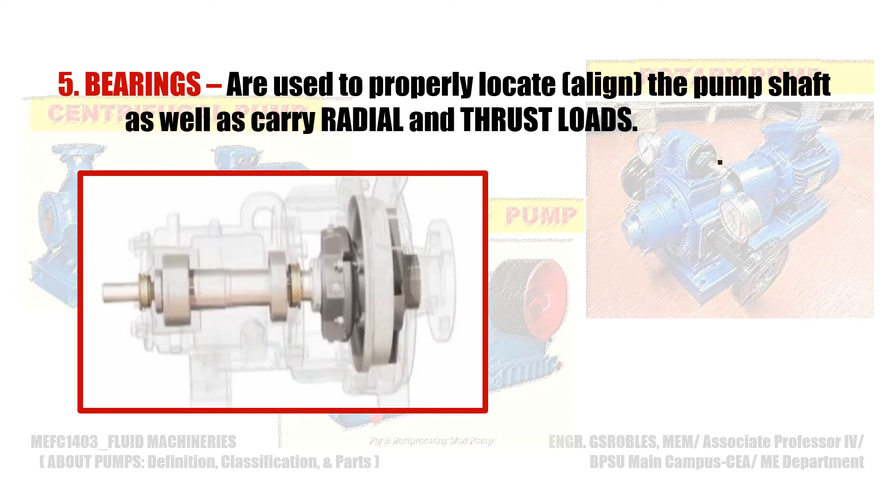So, meron tayong dalawang bearing na makikita. You have the so-called smaller bearing and then you have the so-called larger bearing. So, yung bearings na to, pwede siyang ball type, roller type, sleeve type, as well as thrust bearing type of bearings.

So, as for the bearing types na ginagamit natin, magamit tayo dito ng roller type, which is to be found on the rear side. Sleeve type of bearing - pag sinabi natin sleeve type, dismountable yung pinaka-outer ring compared sa inner part or inner ring. Makikita din natin siya at the back side or rear side.

And then, meron tayong tinatawag na ball type - meron tayong parang bulitis dito. Kailan ginagamit yung ball type? Ang ball type is pwede siyang gamitin as the rear as well as front bearing. Then, last one is meron tayong tinatawag na thrust type, which could be in the form of a roller or that of a ball bearing. Ito is normally makikita lamang natin sa rear side. Yan, so ito yung mga bearing types na gagamitin natin to properly align yung shaft natin inside the centrifugal pump.

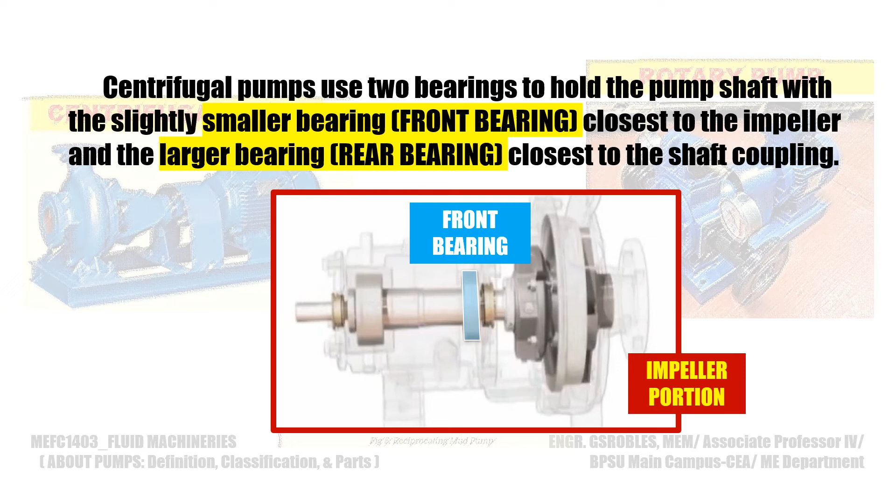The two mentioned bearings have their designated locations. The front bearing is considered the smaller bearing, and we can see it nearest to the pump impeller portion. The other bearing is the so-called rear bearing, which is the bearing we see at the backside, closest to the shaft coupling or electric motor portion. So the rear bearing is the larger bearing, farthest from the impeller but nearest to the shaft coupling or electric motor portion. The front bearing is the smaller bearing, located nearest the impeller portion but farthest from the shaft coupling or electric motor portion.

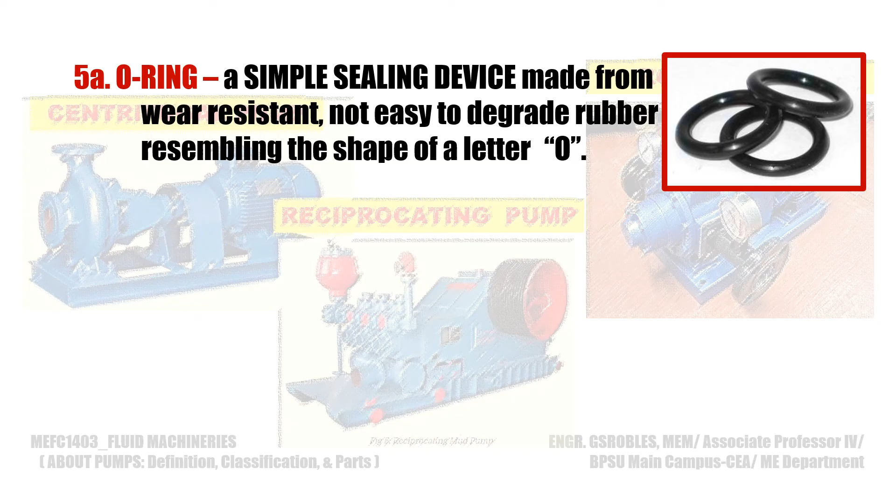Next is the so-called O-ring, which is actually used in tandem with the bearings. The O-ring is a simple sealing device usually made from a wear-resistant but not easily degradable rubber, resembling the shape of the letter O, hence the term O-ring. This part provides a positive sealing action, meaning there is no possibility of leak taking place at all. It prevents the lubricating oil inside the oil chamber from seeping out or leaking out. This is the O-ring, and it prevents the leaking of our oil outside the oil chamber.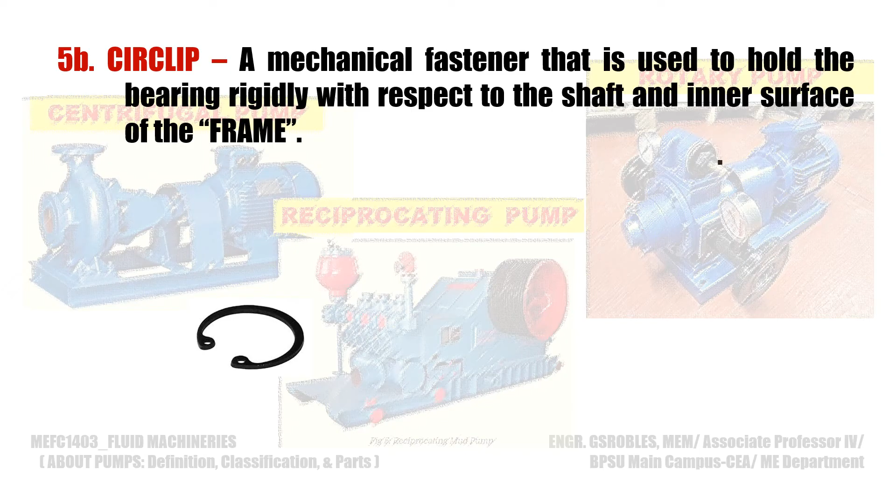Another part is the so-called circlip. This is another mechanical fastener used to hold the bearings rigidly in place with respect to the shaft and the inner surface of the frame. This clip is rigid enough to prevent possible slippage but not so rigid that it cannot be disassembled, meaning it can be removed easily. To remove it without difficulty, we use what is called a circlip plier. We insert the very tip, the two ends of the circlip plier, into the two holes. Once we press the handle, the tendency is that it opens up, and that's the time we can remove the circlip from where it is mounted on the shafting.

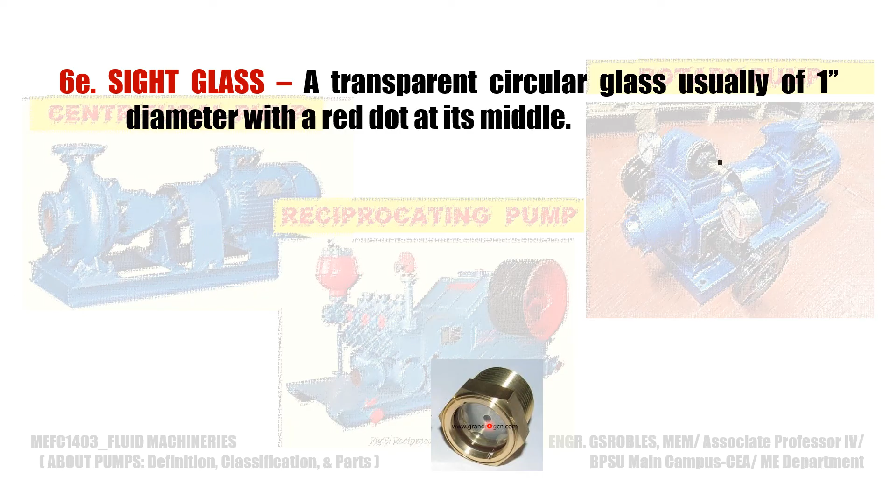Itong sight glass na ito is apparently the portion where you could actually take a look inside the oil chamber to verify if nasa tamang proper level ba yung oil lubricant natin, which should always be located halfway. Kaya yun din yung reason kung bakit yung pinaka-dot natin is located at the centermost portion. So it indicates that the proper oil lubrication natin should be located or should be midway or halfway lamang.

Yan. So another one is you have the so-called oil replenishing glass. It is another frame part where replenishments of lubricating oil could be done if the level of oil lubricant inside such oil chamber is below halfway. So kung kakaunti lang na may diferensya ng tinutukoy nating oil level from the inside, dito tayo magkakaroon ng replenishments. Hence the term oil replenishing glass.

So para lamang siyang inverted glass with threads at the tip. So threaded siya. Minamount natin siya dito sa threaded pipe or portion natin dito.

So last of the frame part is the so-called rear bearing cap, which is considered to be a cover at the backside of the centrifugal pump to hold off the lubricating oil from the chamber from seeping out or leaking out. Ito, nakamount siya dito sa pinakadulo niya, preventing the lubricating oil from going this possible direction. Parang pinaka-stopper. Yan.

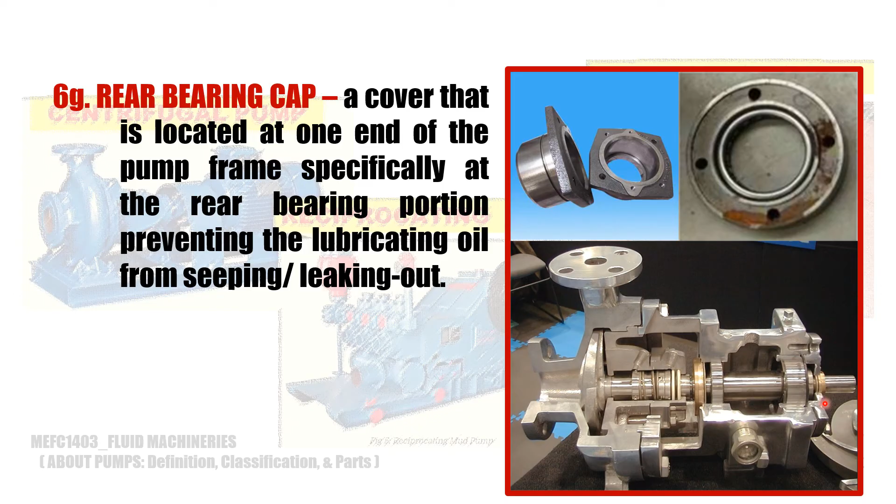So another centrifugal pump sacrificial part is yung tinutukoy nating wearing ring. Para siyang sing-sing. This is 3 out of the 4 sacrificial pump parts na na-discuss ko so far. Ano ba yung purpose niya? This one actually keeps the impeller surface from abrasion. Abrasion is gas-gas, saving the impeller from damage, and then keeping to itself the impeller, the abrasion damage.

So instead na masira natin yung impeller, ang sisirain natin dito is yung tinutukoy nating wearing ring. Again, since ito is considered to be another pump sacrificial part, it is made from a less stronger material than the one that it is actually protecting. So mas matibay yung pinaka-impeller natin as compared sa tinutukoy nating wearing ring.

Another design purpose niya is that it keeps internal recirculation of the fluid down to a minimum. So internal recirculation affects pump performance in that the desired output is not met. Pag sinabi natin internal recirculation, nagtatagal ng bahagya yung liquid natin instead of being discharged to the outside. Meaning, yung expected output natin is not met properly. So sabihin, ang downside nito is pagka meron tayong internal recirculation, bumababa yung output. Eventually, pag bumababa yung output, bumababa din tinutukoy nating pump efficiency.

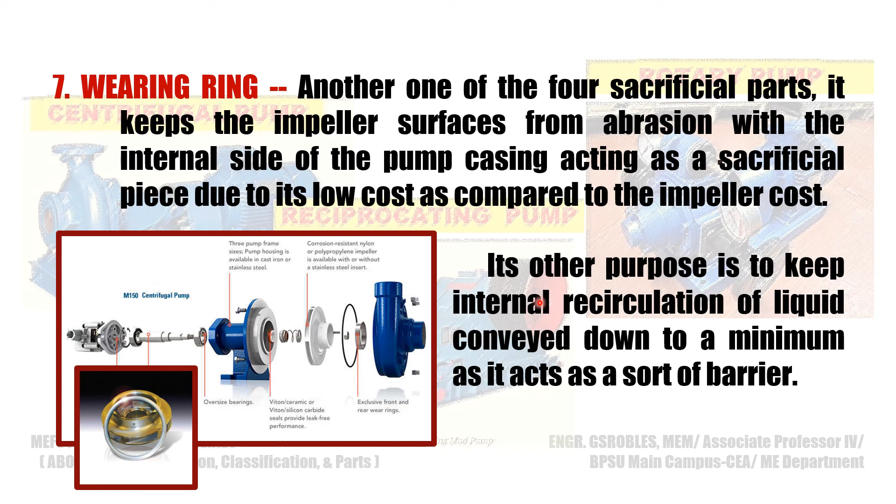Now, yung dami ng wearing rings to be used in a centrifugal pump is dependent upon the size of the centrifugal pump itself. Kapag medyo malaki yung centrifugal pump natin, it requires the use of 2 wearing rings. Itong nakikita natin sa picture is a large centrifugal pump, hence it makes use of 2 wearing rings. So in case naman na we have a smaller centrifugal pump, 1 wearing ring is enough.

So yung last sacrificial centrifugal pump part natin, 4 out of 4, is yung tinutukoy nating wearing plate. Yung paggamit nito is totally dependent upon the type of impeller. So in cases na yung centrifugal pump natin makes use of an open type of impeller, as shown in this current configuration, then required tayong gumamit ng wearing plate. Gumagamit tayo ng wearing plate mainly to protect the impeller from damage due to abrasion as well as keep internal recirculation down to a minimum. Same purpose siya doon sa tinutukoy nating wearing ring. Pero yung isa is ring, ito naman is actually...

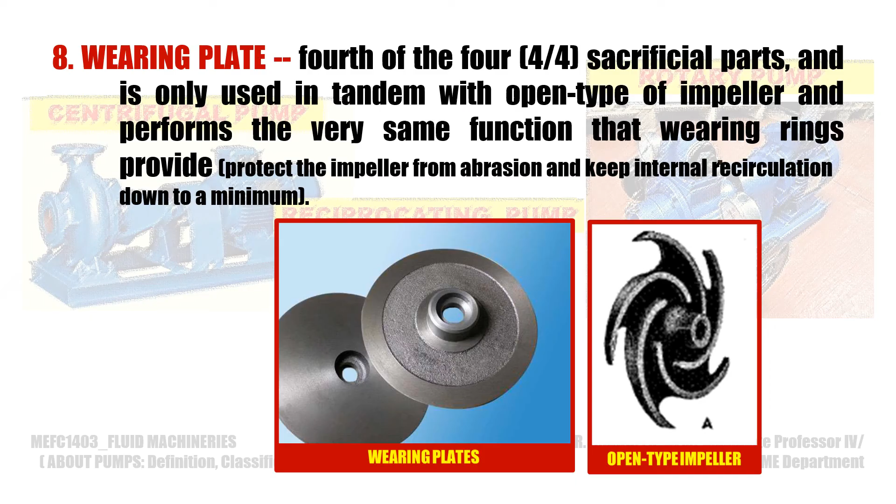So, next centrifugal part is the so-called shaft coupling, which is another power transmitting element that always exists in pair. So, one side is on the driver side, and the other side is on the driven side. This is the driver side, and this is the driven side. So what is the purpose of the shaft coupling?

It actually connects the driver shaft to the driven shaft. Using a single pair of shafts is actually not advisable, since the assembly of electric motor and centrifugal pump is quite large and there are cases where they don't get damaged at the same time. So there's a need to isolate the part that's damaged, which is why we need to use a shaft coupling. But in cases where the assembly of the electric motor and centrifugal pump has some issues, it's advisable to use a shaft coupling to isolate or dislodge the damaged part needing repair or maintenance.

Shaft couplings are actually available in rigid and flexible types. If we have no concern regarding alignment of the shafting, or we have what we call perfect alignment, using a rigid coupling is enough. But if we have some sort of small degree of misalignment, this is where we use what we call flexible coupling.

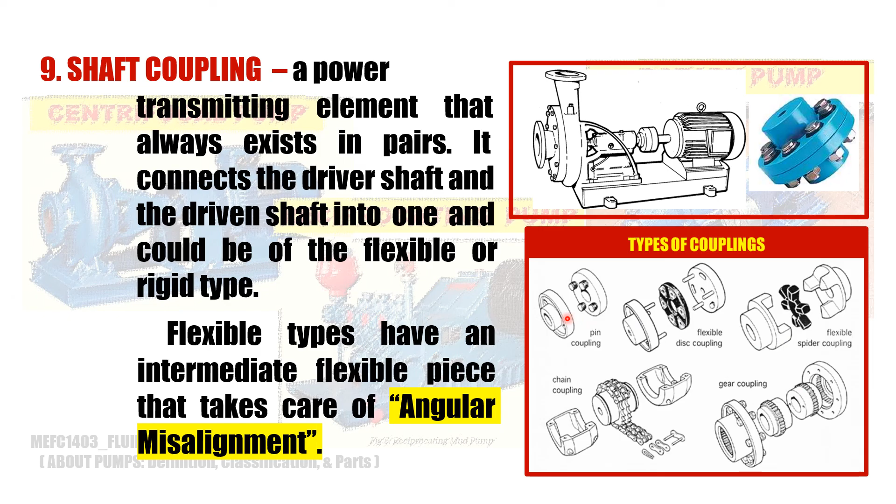The flexible coupling, if we look at it, has a sandwiched flexible material. If there's some sort of misalignment, this flexible material found in between the two halves of the shaft coupling adjusts accordingly. That's the purpose of the flexible coupling. So this is the flexible coupling, and this is the rigid coupling.

Another one is the so-called shaft coupling housing. Since our centrifugal pump is usually located in harsh outdoor environments, there is a need to protect the rotating shaft as well as the coupling, since they rotate at very, very high speeds. If a fallen branch or any foreign material gets in, it could jam or cause disruptions to this high-speed rotating device. In that case, we need to use a shaft coupling housing, which actually protects the rotating assembly from getting caught with a foreign object that might cause jamming issues.

Now, to conclude my long PowerPoint discussion, these are the other parts or pieces that could be found in a centrifugal pump assembly. One is the so-called prime mover, also called the driver. This drives or powers up the driven unit, or what we call the centrifugal pump. The prime mover actually converts one form of energy into mechanical energy.

This prime mover could be an electric motor, which converts electrical energy into mechanical energy. It could also be an internal combustion engine, which converts the chemical energy possessed by the fuel into thermal energy, which is eventually converted into what we call mechanical energy.

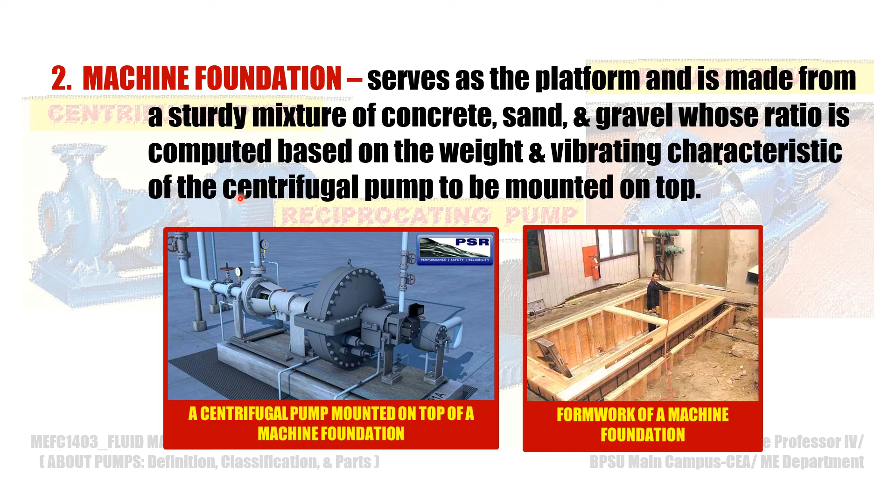Next, we have what is called the machine foundation, where the heavy driver-driven assembly is actually mounted. Due to the heavy weight as well as vibrating characteristics of a centrifugal pump unit, there should be a proper machine foundation built. There are actual sizes as well as actual computations regarding the proper ratio of sand, gravel, and cement, as well as the proper amount of water, with the size and number of rebars also taken into proper consideration. Our objective in using the machine foundation is to actually prevent the driver-driven assembly from sagging or falling from its previous mounting level.

Next is a part of the machine foundation: the so-called anchor bolts. The anchor bolt has an L-shaped configuration. This is the means to secure the driver-driven equipment onto the machine foundation. Here we can see the anchor bolts: 1, 2, 3, 4, 5, 6, 7, 8 anchor bolts located on this side, and on the other side which isn't visible, there's a corresponding configuration.